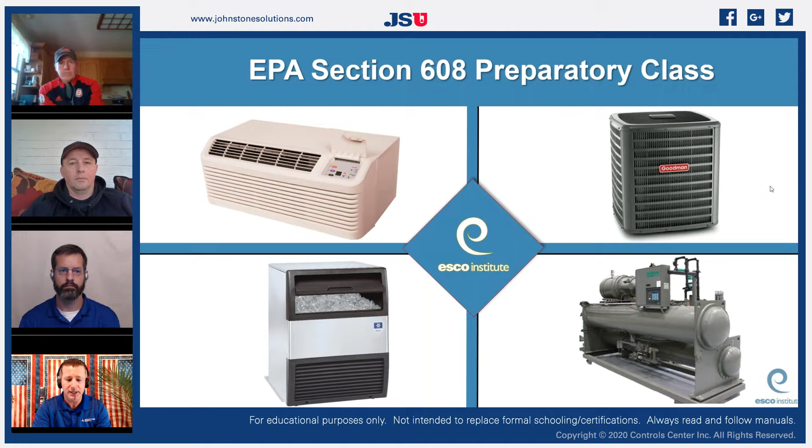So what the ESCO Institute does is they work hand in hand with the EPA to develop an appropriate training module for being prepared for your EPA license. This is built by ESCO, and this is owned by ESCO. It's just being presented by Johnstone Supply. I've been talking extensively with ESCO for the last couple of weeks, and they're very excited that we're offering this one-time free opportunity for you guys.

We normally do these ESCO classes once a month at each of our Johnstone Grimmie Group locations. With the situation that we have, we're just not able to do that. So we're just going to be spending time with you and prepping you for your EPA. So if you have not taken your EPA before, or if you just have a type 1 or type 2 and you're wanting to upgrade to a universal, or even if you just want to stay up to date on

the current EPA regulations, this is what you want to do, because EPA states that it is the responsibility of the technician to stay up to date on the most current regulations. So it will be your responsibility to stay updated with what is changing in our industry. And we've had a lot change in our industry.

So this manual is intended to prepare technicians for the Environmental Protection Agency, the EPA Section 608 certification examination, and contains the information required to successfully complete the exam. We are not saying that if you know all this information, you're going to get a universal EPA. We're just going to give you the majority of the material that you need to know, but it will be your responsibility to prep properly for your test.

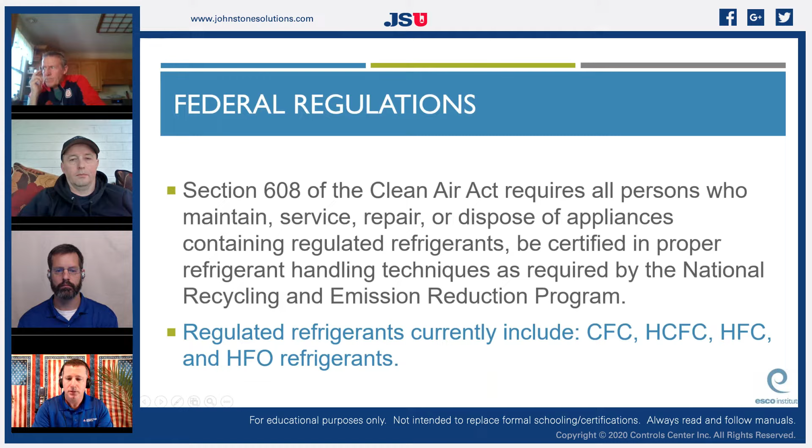If you maintain, service, repair, or dispose of an appliance containing a regulated refrigerant, you must be certified, and this is one of the big misconceptions in our industry. If you are an apprentice working with a technician in the field, you cannot legally work under another person's certification. The only time that falls into consideration is if you are in a classroom receiving instructor education, you can follow instructions from your instructor.

But if you're in the field servicing equipment, you must be certified. You cannot work under somebody else's license. So it's your responsibility to get certified.

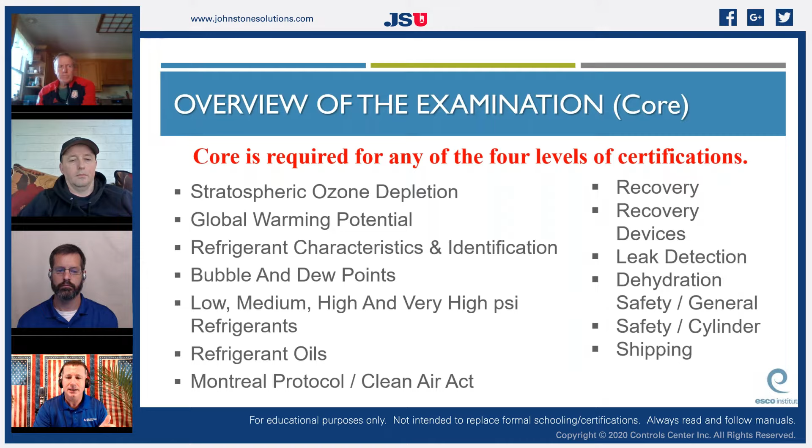If we're looking at what we're going to cover today and tomorrow, we're going to run through all of these. We're going to talk about stratospheric ozone depletion quite a bit, global warming potential. We're going to go through different dew and bubble points. We're going to talk about the different pressure systems, low, medium, high pressure, and very high pressure. We're going to go through all of our recovery, recycling, and reclaim techniques, and we'll spend quite a bit of time on each one of these.

So let's talk about what each section is, so you have an understanding of what type 1, type 2, and type 3 is. Type 1 will be considered persons who maintain, service, repair, or dispose of small appliances. They must be certified as type 1 technicians. A small appliance is defined as a pre-built assembly with a factory charge of 5 pounds or less. That's a lot of different types of equipment.

If we think about that, 5 pounds or less, that could be a packaged window air conditioner. That could be a refrigerator. That could be a chest freezer. That could be a water cooler. There's a lot of different things, ice machines, dehumidifiers. Those are all things that are included in type 1. So if you become a small appliance repair person, you're required to have type 1 and core.

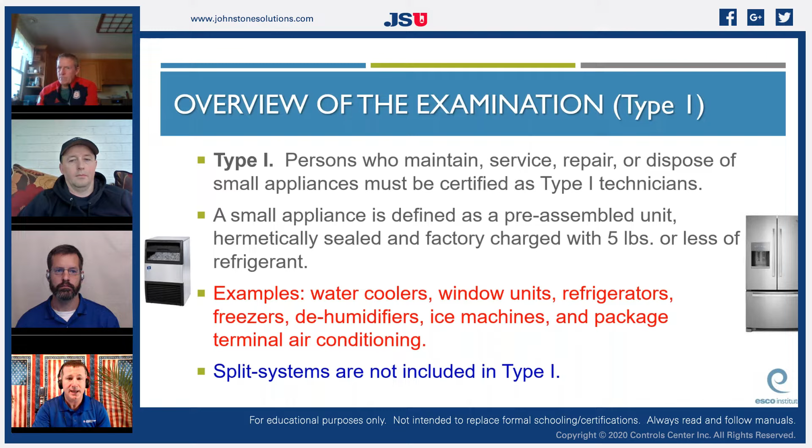Type 2 is persons who maintain, service, repair, or dispose of appliances containing more than 5 pounds of refrigerant, or if the installation requires charging. That's us. Anytime we have a system that has to be put together, where we have to calculate the refrigerant charge. Anytime we have soldering or flaring, that is type 2, and that is us. So in residential, commercial, and industrial air conditioning, that is going to be a type 2 license.

So we are required to have a type 2 license in our industry, and there's quite a few technicians out there that only have a type 1. So this is a great opportunity to study for your type 2 and for your type 3. Type 3 is persons who maintain, service, repair, or dispose of low pressure appliances. So that's centrifugal chillers, low temp, low pressure operating systems. It's a whole different classification of refrigeration, but it's still refrigeration. It's the same vapor compression cycle that we're talking about on even our fractional systems.

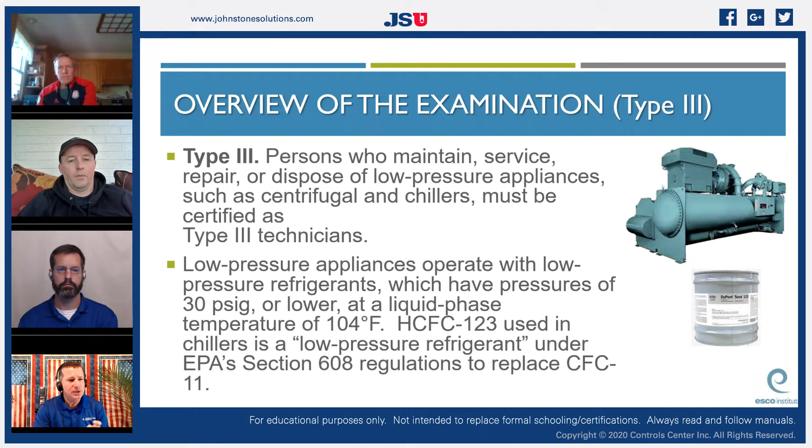The same refrigeration concept that is in your home refrigerator is going to be in these 100-ton centrifugal chillers. So we need to be able to understand that those are still just a large refrigeration system, but they have some special features and some special techniques that you need to know. And so that is a whole separate entity on its own.

If you achieve above 70% in all 4 areas, core, type 1, type 2, and type 3, you will then be awarded a universal, and that's really the goal. We all want you to achieve your universal certification. So that is a person who maintains, services, and repairs both low and high pressure as well as small appliances.

So we really want you to achieve that. So the test will have 4 sections to it. So we'll have core, we'll have type 1, type 2, type 3. Each section will have 25 multiple choice questions, all pulled out of a pool of around 2,000 or so questions. So there's a variety of different tests. So the tests are randomly pulled.

If you come to one of our classes and we're doing the paper one, I'm going to hold about 15 different paper manuals out in front of you. You pick which one. They're all different. A technician must achieve a minimum passing score of 70% in each group in which they are to be certified. For example, if a technician is seeking universal certification, they must achieve a minimum of 70% or 18 of the 25 questions on each section, on all 4 of them.

If a technician fails one or more of the sections, they may retake the failed sections without retaking those sections in which they earned the passing score. So say you go in and you pass core and you pass type 2, but you didn't get your universal, your type 3 and type 1. Well, you can go back later and just retake the ones that you did not pass. So you don't have to take the entire test over.

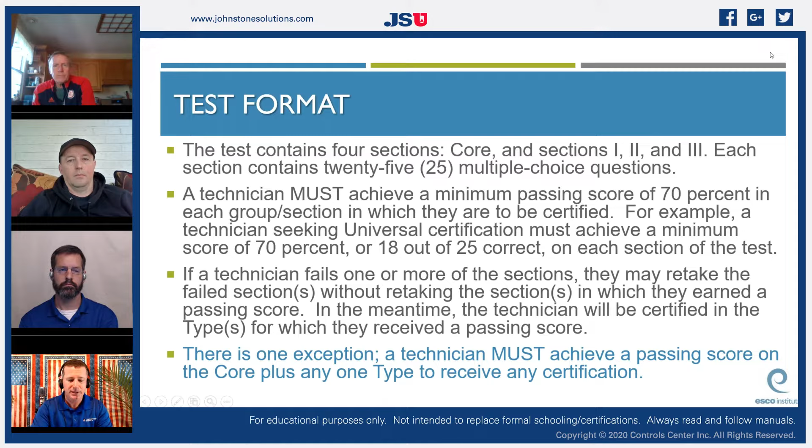So study, study, study. Federal regulations require that this exam be conducted as a closed book exam by an authorized test proctor, whether it's in person or whether it is through live video. The only outside materials allowed are the PT chart and a calculator. Phones are not allowed and must be turned off and put away. Best to not allow phones in the testing room at all.

I know in our classes, we've had people pull out their phones for answers before, and we typically don't pull that student out right then. We allow them to take the entire test because we're not going to disrupt the rest of the classroom. And at the end of the test, the test of the person who's been using their phone or been using material gets thrown in the trash. It's that simple. If you cheat, you cheat.

We don't allow it. Use of any other electronic communication device or attempts to copy, distribute, post publicly, share photos of exam questions, etc., may result in revocation of certification and will be reported to the US EPA. That has been done. I've talked to ESCO and they have verified that they have prosecuted people who have reproduced any of the test materials.

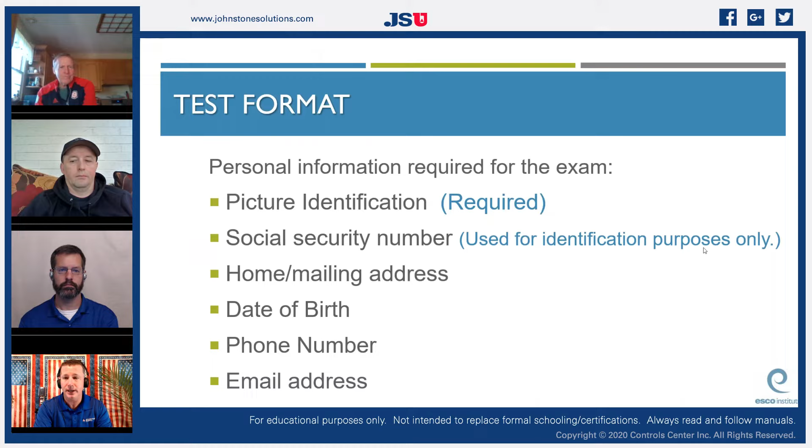Personal ID will be required, so driver's license, registered identification card, social security number, which you'll be using, and then a home or a mailing address that you'll put on that application, and that will be where your paper certificate gets mailed to. So it could be home, or it could be work, wherever you would like for that to go to. You'll need to have your date of birth, phone number, and an email address, and that will be all the information that is used to create your personal ESCO account.

As required, all examination participants must be included in an online registry for lookup by name, city, and state, as well as certification achieved. So there's an online registry from ESCO, because if you apply for a job, a lot of property management jobs, a lot of commercial heating and cooling and refrigeration jobs require a universal certificate.

So if you apply and you say that you have a universal and you actually don't, they may call ESCO and go, hey, does John Brown have a universal? And so they can use that as verification for what level you've acquired. Technicians will be able to opt out of the registry by logging into the ESCO group right there.

The technicians should carefully study the core and all the sections in which they are seeking to achieve a passing score. Definitely take the free online prep tests. They're right there at escogroup.org/practice again. They are provided to give each candidate a sample of the type of questions. They're not going to be the exact questions, but it'll be a sample of similar questions. I typically spend a lot of my time going over my compression cycle in class.

I'm not going to have a lot of time to go through that today, but we are going to go through the basics because it really all comes down to one philosophy. And if you can understand this philosophy, it'll make every piece of equipment you ever encounter a lot simpler. If we look at any refrigeration system, we have a low pressure side and we have a high pressure side. And we are going to have the same function of components in any refrigeration system.

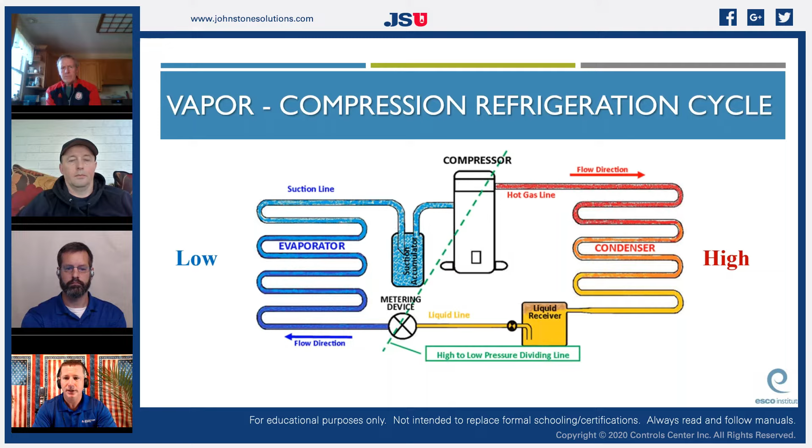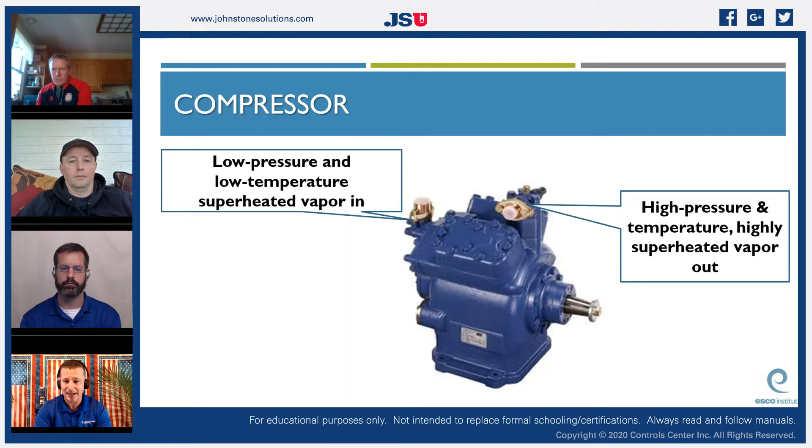So there's different types of compressors. If you look at those, every compressor is going to have a low side valve and a high side valve. It's going to bring in a low pressure vapor and it's going to pump it up to a high pressure vapor. The 3 stages inside of a condenser coil, no matter what condenser coil it is, remember, same philosophy. It's going to come in with superheated vapor. As it passes through there, it's going to start turning back into liquid droplets. By the time we get to the end of it, we should be all liquid.

And by the time we get to all liquid, we're actually going to cool it just a little bit more to make sure that it is completely liquid with no vapor in it. And that is going to be a subcooled liquid now. Same liquid, it's just a little bit cooler. It's not changed state, it changed state in the condenser. It's just a cool liquid.

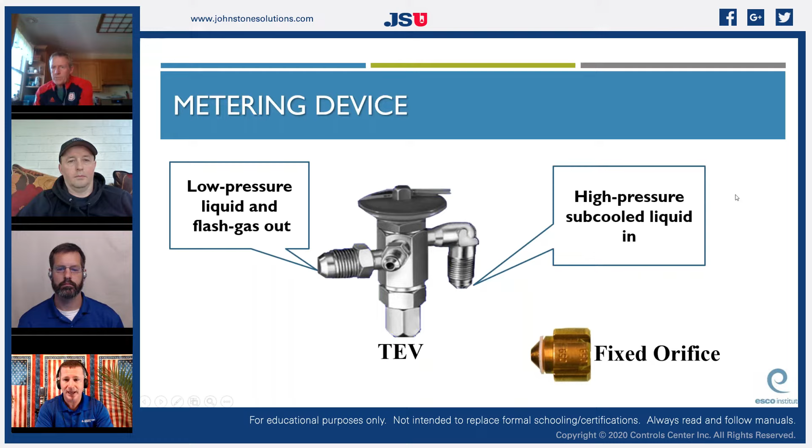Our metering devices are all doing the exact same thing. It's just reducing that pressure. We're coming in with a high pressure subcooled liquid, and we're coming out with a low pressure liquid. It's not a vapor, it's a liquid. It has vapor in it, but it's still about 75% liquid and 25% vapor. That vapor is what we call the flash gas, but it is primarily liquid at this point. It's just a lower pressure liquid. But whether it's a capillary tube or a fixed orifice or an expansion valve, all doing the exact same thing.

If we look at an evaporator coil, every type we run into, we're going to take that 75% liquid, 25% vapor mixture. We're going to go into the evaporator. It's going to boil on its own. It doesn't need any assistance from us. We reduce the pressure, which caused it to start boiling. So we don't need to move air across it, but we're going to take advantage of that process and try to remove some of the heat from our space, or from our water that's passing over on a commercial ice machine.

So we're going to pass through that system. All of our energy is exchanged while we are boiling from a liquid to a vapor, right? So by the time we get to the end of our evaporator coil, it should all be boiled off. There should be no more liquid. We just want to make sure there's no liquid, because the next stage of our system is our compressor, which is a vapor pump. So we want to make sure we've boiled off. So we know that we stopped boiling around here.

We just let that temperature rise a few more degrees, so that by the time it gets to the outlet, it is considered superheated, which just means it's heated above its boiling point. You know, if that was water at room temperature, water boils typically at what, 212 or so? So if I measured some steam and it was 215 degrees, I would say that it's superheated by 3 degrees. That's all we're doing.

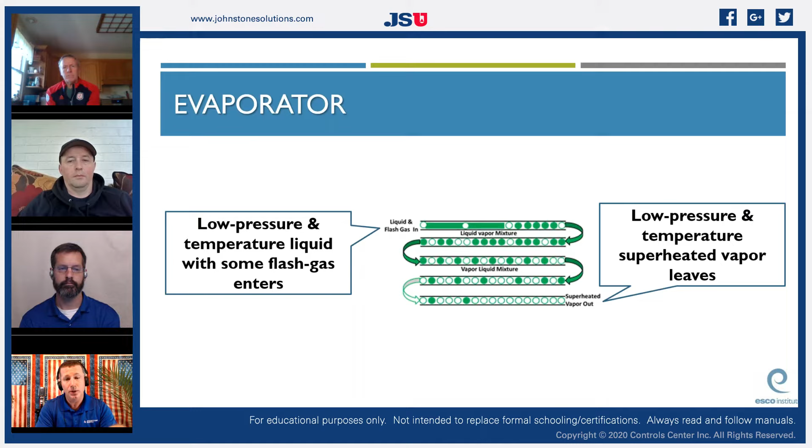All right, a system that uses a thermostatic expansion valve, or TEV, is usually equipped with a receiver located on the liquid line directly following the condenser, because remember, that expansion valve is expanding. It's moving, it's changing the flow of refrigerant. So if our compressor is just pumping along, but our coil says, hey, I don't need that much volume right now, I'm going to use my expansion valve, and I'm going to pinch down a little bit.

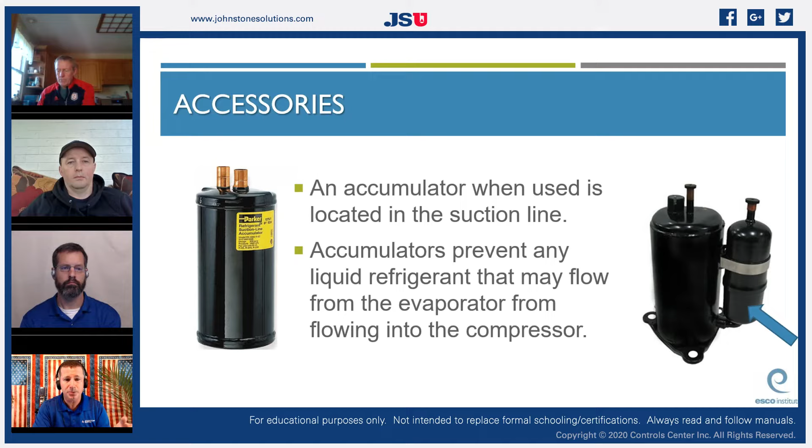Well, then that backs up how much liquid we have in our system. So we store it in a receiver. That's all it is, just a tank to store excess. An accumulator, when used, is located on the suction side. So accumulators prevent any liquid that might flow from the evaporator to get into that compressor. Remember, we cannot get it in there.

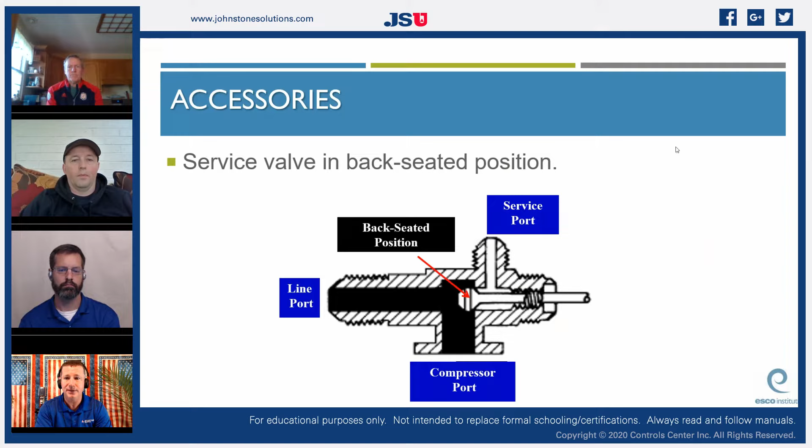If you have an elongated stem on your cap, that means you have a long stem service valve, and it's probably a back-seated style. So you actually have to take your service wrench, and this has got a square tip on the end of it. You take your service wrench and you run that in, just even a quarter of a turn is sufficient. So be aware that we have a couple different styles of service valves in our industry.

How to use a PT chart, because not everybody understands a PT chart. So what does a PT chart actually do? It provides the pressure temperature relationship of refrigerants. So if we take it at its core essence, what it is doing is telling us, at the pressure that is in our system, what temperature our refrigerant is going to boil or condense. So we can manipulate boiling points.

I do this in one of my classes. When I'm doing this PT chart, I actually take a mason jar of water, I put it on a desk and go, hey, what temperature does water boil at? If you don't know, you need to come back and watch some of our Flex Train classes, because we actually talk about that. Because water is a refrigerant.

It changes state. It changes from a liquid to a vapor, changes from a vapor to liquid. It also changes from a liquid to a solid. So we're just manipulating in the same way with refrigerants. So whether the tank is half full or has just a few ounces of liquid, the pressure will be the same if both tanks are at the same temperature.

So the refrigerant is going to have a stable state in it, and we actually show this in our classes as well. I can tell what refrigerant is in a tank by letting it stabilize. So if I leave it in a room that is 72 degrees overnight and I come back the next morning, it's still 72, I know that my refrigerant is stabilized at 72 degrees. I can take my temperature pressure chart and go, hey, R410A at 72 degrees is X.

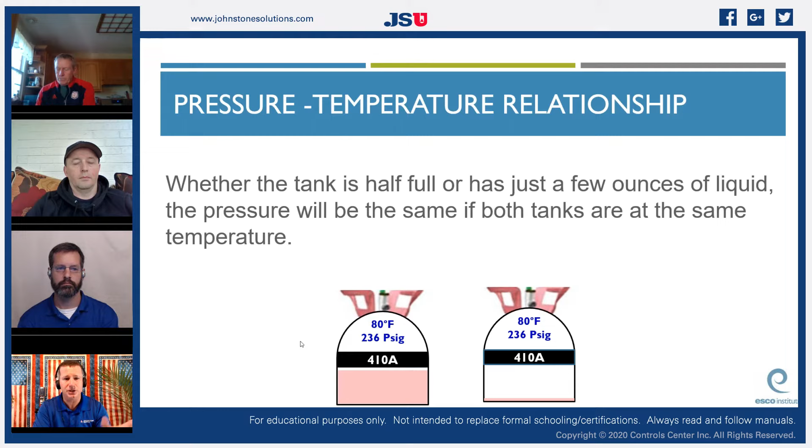If I go R410A and it's an 80 degree room, R410A at 80 degrees, I can put my gauges on there and I'll have 236 PSI. So it's a relationship to our temperature and our pressure.

Refrigerant will migrate to a compressor's crankcase and mix with oil when there's a difference between the oil pressure and the refrigerant vapor pressure. Compressor crankcase heater is used to control that. So a crankcase heater is absolutely crucial on the operating of a system. If you have a crankcase heater, particularly on heat pumps, you need to verify the condition of that crankcase heater, because it's used to keep that oil hot so our refrigerant doesn't migrate back into it. Remember, we don't want liquid into our compressor.

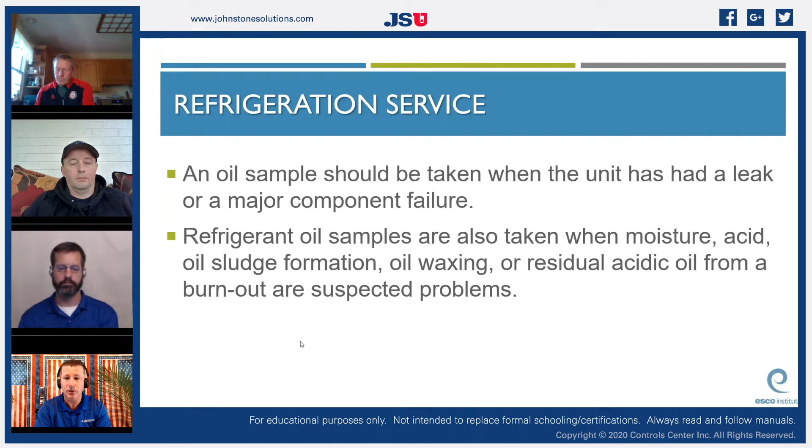An oil sample should be taken when the unit has had a leak or a major component failure, because we're going to be looking for contamination or acids in the system. Refrigerant oil samples are also taken when moisture, acid, or oil sludge formation, oil waxing, or residual acidic oil from a burnout are suspected problems. That's how we can tell what happened to the oil in the system.

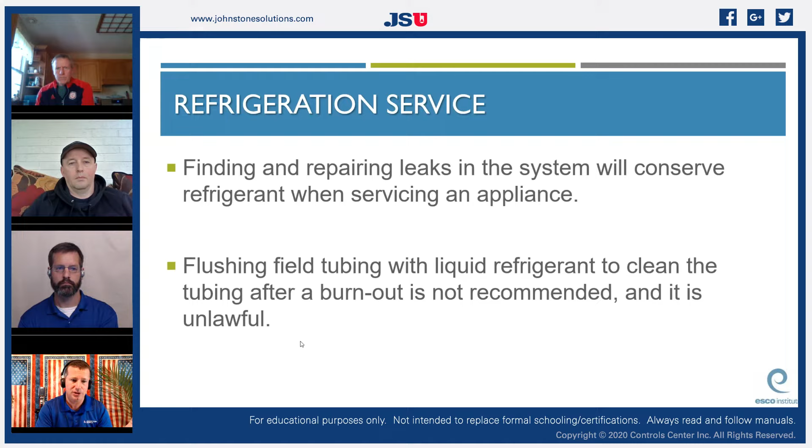Finding and repairing leaks in the system will conserve refrigerant when servicing an appliance. So flushing field tubing with liquid refrigerant to clean the tubing after burnout is not recommended. It is actually against the law. We have specialty cleansers. They're basically like refrigerants. They're a boiling liquid, but they're not a chlorine or fluorine-based refrigerant. They're a solution, a cleaning solution. We use a lot of like Rx11 flush. So we don't use refrigerant to flush out a line set.

We use certified cleaners. After we make a major repair, the appliance should be dehydrated by evacuating the system to a minimum of 500 microns. Every manufacturer has a requirement of 500 microns. I actually see people that are routinely running them down to 250 just to verify that they have gotten even below the manufacturer's recommendation. If you get them down to that point, you know that you're going to have a nice dry system. And we've actually got videos on how to properly evacuate a system and do it quickly and efficiently.

Under no circumstances should a hermetic compressor be operated when there is a vacuum in the system. Electrical arcing can occur that will burn the terminals inside of the compressor. So we have to make sure that our electrical disconnect is off when we're pulling vacuum on our systems.

When we talk about the gauge manifold set, I always teach in my classes how to read superheat and subcooling, actually calculate superheat and subcooling using a gauge manifold set, because they are a little bit different if you look at those. And it's the most important tool in our industry to be able to understand the pressures inside of a system. There's a low side and there's a high side, and depending on the refrigerant, the high pressure gauge may be rated 500 if it's an R22 system, sometimes even lower than that, and 800 if it's an R410A or higher.

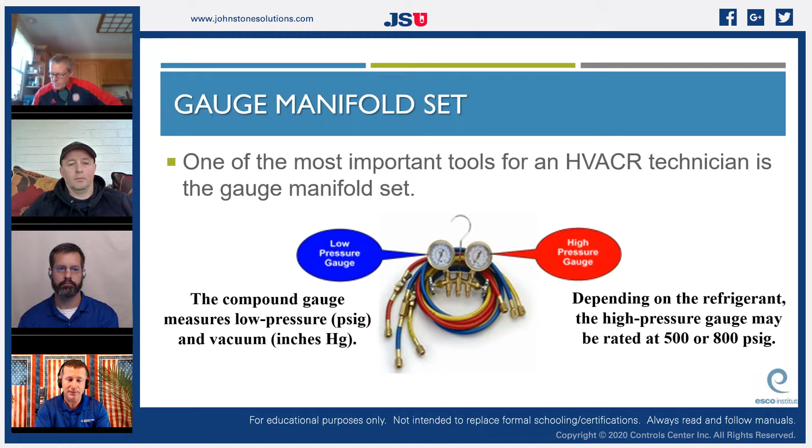Now, the compound gauge measures system pressure for low side in pounds per square inch, PSIG, and vacuum in inches of mercury. This is what makes the low side gauge different than the high side gauge. The high side gauge is just all positive pressure. The low side gauge is not really a low side gauge. It's called a compound gauge because it reads negative pressure in vacuum in inches of mercury, and it reads positive pressure in PSIG.

One of the things that I always point out to people, because they don't always understand what our internal dials are. Remember, we're talking about our temperature pressure chart. If I had a paper temperature pressure chart, that is telling us at what temperature our refrigerant is boiling based on the pressure in the system. That's all these inside dials are. We've just taken that PT chart and put it on a gauge.

So if I put my gauge on and I have 60 PSI on my system, then I know at what temperatures my refrigerants would boil. If I had, this is R22 on the green dial, my R22 would start boiling at around 33, 34 degrees, right?

So anything above 33, 34, I would be vapor. Anything below 33, 34, I'm gonna be liquid. If I was an R410A system, I would have my refrigerant boiling off at around 22 degrees. If I was an R134A system, my refrigerant would be boiling off at around 62-ish, somewhere in that ballpark. So all we have actually done is taken our fold-out temperature pressure chart and we've put it onto our dials so that it's easy to see.

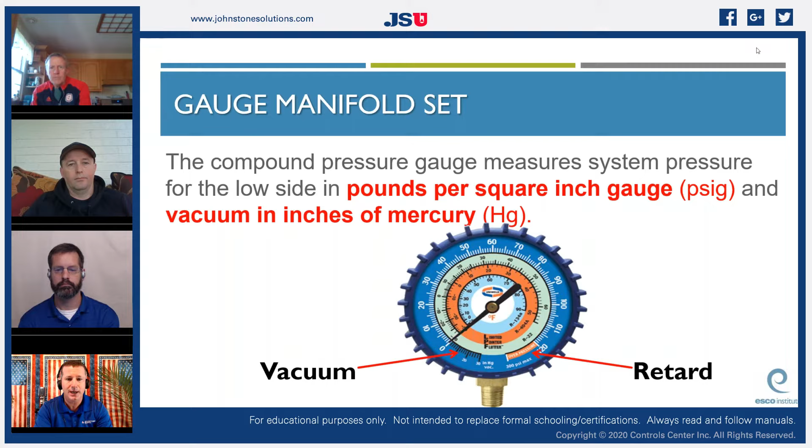An electronic manifold may have combined temperature probes to measure those temperatures so it can calculate superheat and subcooling. And I love using electronic gauges. They do the job for us faster. But like I said, if you don't know what they're doing, don't fool yourself. Don't look at a number and judge a system by the number that you're being told. Understand what that number is. Go back to our superheat and subcooling class.

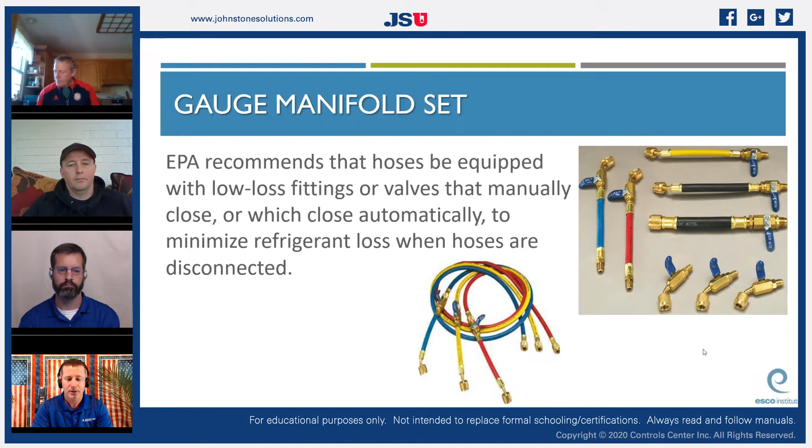EPA recommends that hoses be equipped with low-loss fittings or valves that manually close or which close automatically to minimize refrigerant loss when they are disconnected. There's a name for this, and you'll probably encounter this if you're taking an EPA-regulated test of any type. Minor releases when connecting or disconnecting the hoses for servicing and recovery are considered to be a de minimis release. The minimum, de minimis. This type of release is not considered unlawful.

So by law, you have to have fittings on your hoses. If you're just using standard hoses that are open on the end without any type of a low loss fitting, and you connect those onto an air conditioning or refrigeration system to service it, and you take that off and all of that refrigerant is escaping out of your hose, you're actually breaking the law. So something to be aware of. We need to make sure that it has fittings to make it a de minimis release.

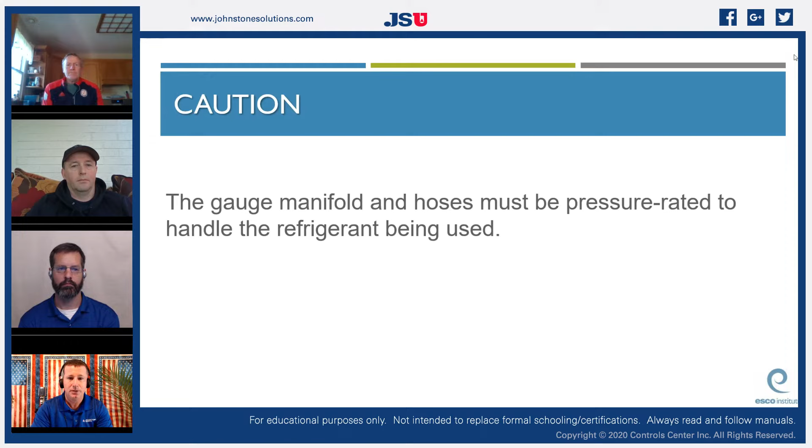The gauge manifold and hoses must be pressure rated to handle the refrigerant that's being used. If you go to a yard sale and pick up an old set of R12, R22 manifold gauges, you're not going to want to put that on that R410A system. The hoses are probably not rated for burst pressure properly. So be aware that your hoses need to be of proper ratings.

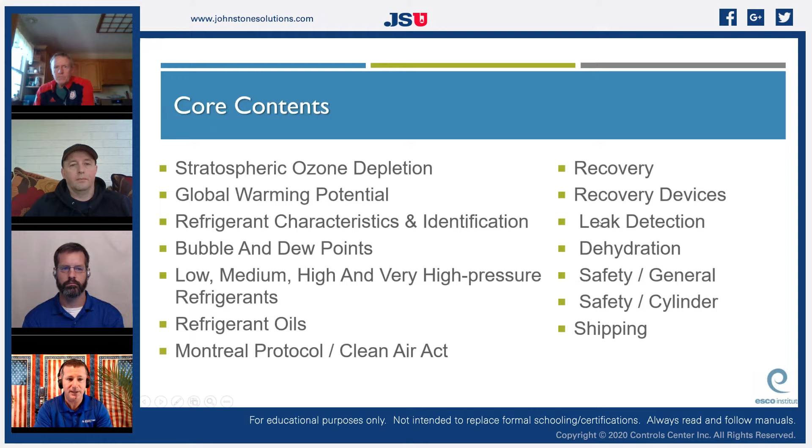Now, when we get into the science of why we're here, the main topic is going to be stratospheric ozone depletion. That's the whole reason the EPA is in our industry. EPA is governing what we do because of effects that we have found in our ozone, and it primarily happens with our stratospheric ozone depletion. There's going to be a lot of science here. So if you're science buffs, you're going to enjoy this. If you don't like science, you may struggle on understanding some of this, and you need to understand what we're talking about. So this would be really good stuff to do prep courses on if any of this is unfamiliar to you. So let's just kind of rebrief what we're going to be talking about.

So stratospheric ozone helps form the Earth's protective shield. The ozone layer protects Earth from ultraviolet radiation from the sun. And if you're from my generation and older, you're going to know the words the ozone hole. You've been told about the ozone hole. A lot of younger generations weren't focused as much on the ozone hole. We're going to talk about that here in just a minute.

But through the 1990s particularly, we started talking about this thing called the ozone hole and the hole in the ozone layer. And we talked about it in school, and we started understanding that we had this hole in our ozone, and we didn't really dive into what it was. We just knew that it was there, and we knew that it had some negative effects.

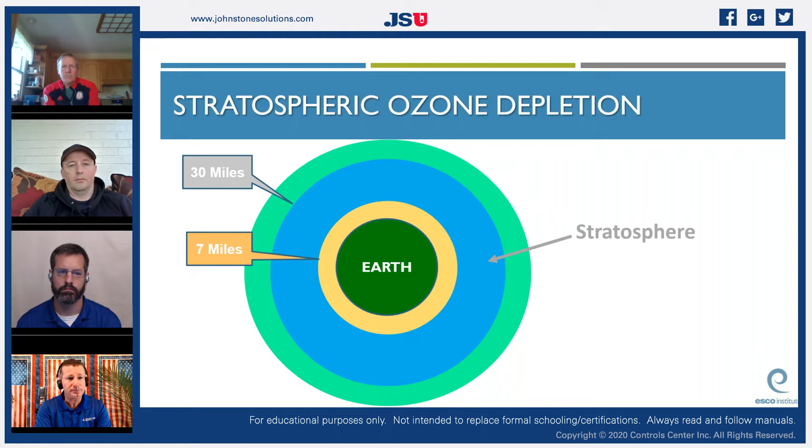Well, when we start talking about the ozone layer and the hole in the ozone, we need to understand where it's coming from. And what we're going to talk about is stratospheric ozone depletion. So the stratosphere is a layer of vapors that is between 7 and 30 miles off from Earth's surface. Very important to know, between 7 and 30 miles.

And ozone depletion potential measures the ability of a substance to destroy ozone in the stratosphere. So what scientists found in the 1990s, when we started recognizing this hole in the ozone and what it really is: when we think about it, we just think of something that burst through and burnt this hole into the stratosphere. Well, it's not really that. It's really a large area of the stratosphere where we have measured a depletion of ozone quantity, and it's a very significant area.

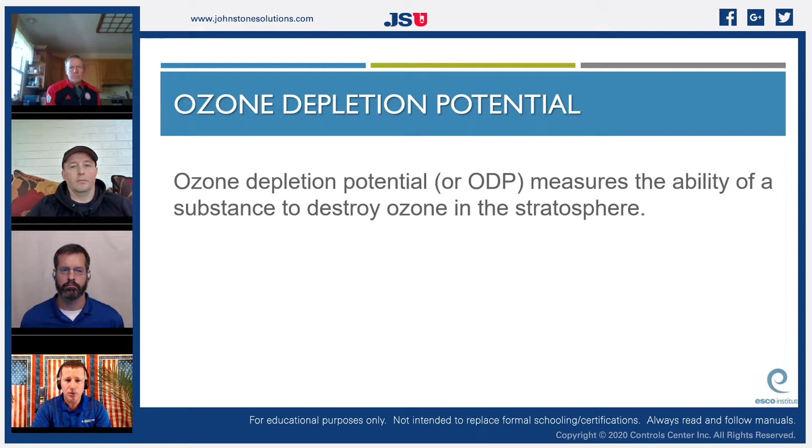But we were measuring it, and we noticed it increasing. We noticed this hole growing, and we didn't really know why. So we started looking at why the ozone was depleting. We started measuring different chemicals found in the stratosphere over a period of time, and looking at what could be the potential ozone depleting substances, right? And we were also finding that as the hole in the ozone, or this depletion of ozone, was increasing, we noticed some effects around the world, and that it was a global problem affecting all of us. So we needed to find out why we were having this issue.

So one of the most serious results from the thinning and damaging of the stratospheric ozone layer is an increase in the rates of skin cancer in humans. And I'm here to preach this to you. I lost my father not even 2 months ago from skin cancer. He worked heavy machinery through the 1980s, 1990s, and 2000s, before they started using canopies, before they started understanding the severity of skin cancers. And we are really finding a huge increase in skin cancer in humans over the last 3 decades, very much because of the destruction of our ozone.

All these little spots on my face, every few months I have to get them burnt, and that is because of working in the HVAC and refrigeration industry, being on roofs all the time, being out in yards all the time. As technicians, we need to be very aware that we are working and living in an environment that has become more dangerous over time.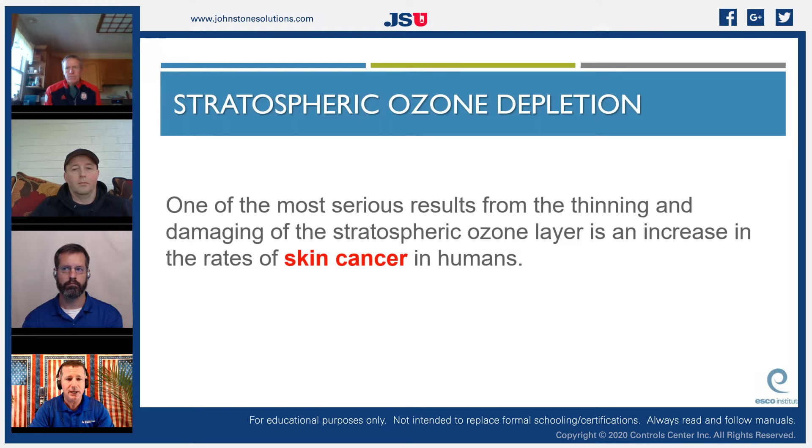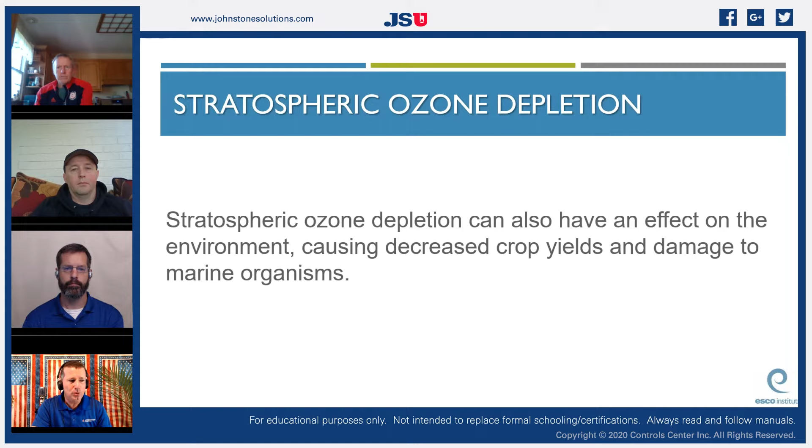So we started looking at why we were having these increases in skin cancers and in cases of cataracts around the world. And we really started finding that it was an effect on our environment, even our crop yields and marine organisms. We've all seen coral reef destruction and devastation, and it's all happened in a very short window of time, right? So we knew this hole in the ozone was probably a culprit, and we started measuring higher levels of chlorine and fluorine.

So scientists started going, okay, are there other places where we can get this? And we did. Air samples taken over erupting volcanoes showed an increase in chlorine up in our stratosphere. And we're like, maybe it's volcanic eruptions. Well, then we saw that the particular type of chlorine released by volcanoes would actually return back to the surface the way nature intended it to, right? But we found there was a lot of chlorine and fluorine that was staying there.

And as we measured this increase of chlorine and fluorine in the stratosphere, we noticed a direct correlation to the chlorine and fluorine we were manufacturing down here at the surface. The rise in chlorine measured in the stratosphere matched the rise in the amount of fluorine. They were going up the same, and they were a very different chemical formulation than the chlorine coming from the volcanoes. This increase of chlorine and fluorine were following each other, following a path.

So the rise in the amount of chlorine measured in the stratosphere by NASA and other agencies over almost 30 years now matched the rise in chlorofluorocarbon and hydrochlorofluorocarbon emissions over the same time. So as they were tracking refrigerant use and refrigerant release, they went, uh-oh, we've got a problem.

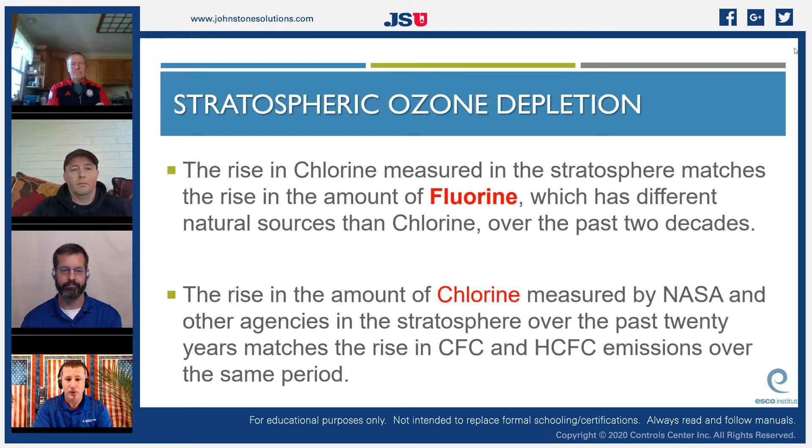These refrigerants are our culprit. We talk about global warming a lot now, but in the 90s, we talked about the hole in the ozone because that's when we found the direct correlation. Yes, fossil fuel emissions are a major component to global warming. They don't have much to do with this ozone depletion factor.

And so what we found, and it was very, very clear, that the culprit was chlorine, man-made chlorine. That chlorine-containing refrigerants have changed the natural balance and thus depleted a significant part of our ozone layer. And we went, holy smokes. Let's study this a little bit further and let's find out what's going on.

So what they found was that if we look at an ozone molecule itself, an ozone molecule in its essence is a component that has 3 oxygen atoms, all tightly bonded to each other, right? That's it. It's oxygen, oxygen, oxygen. But they molecularly connect and they form a very, very tight bond. And by design, that's what they're constructed to do. That's what they were created for. And what they do by having that bond is that they reject ultraviolet radiation.

So what we did, and we were able to prove this in labs, we've seen it going on in the stratosphere, we would find that when we introduced a chlorofluorocarbon molecule with ultraviolet radiation, we could simply take a UV light and a vapor refrigerant and penetrate that with UV light. And when ultraviolet radiation came in contact with a refrigerant molecule, and this is chlorofluorocarbons, we're talking like R12, ultraviolet radiation would separate off one or multiple of those chlorine molecules.

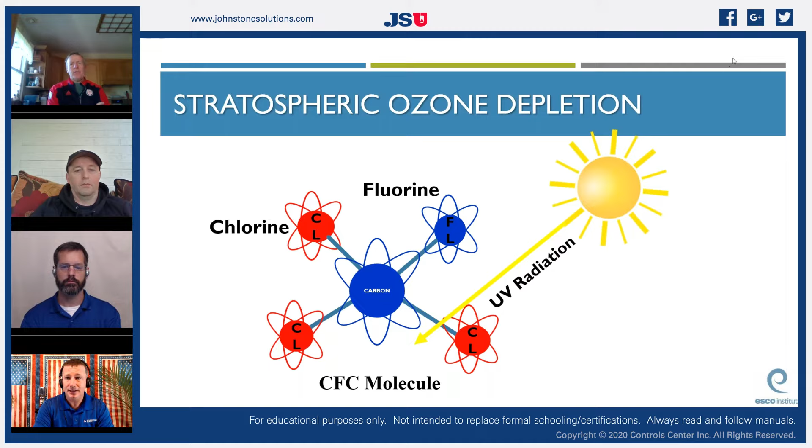Then when you had that free chlorine molecule, it could actually introduce itself with the ozone molecule, and it had a molecular weight that would draw off one of those oxygen atoms. So we no longer had an ozone molecule that had 3 oxygen atoms. We would actually tear it apart with one of our chlorine atoms. So our chlorine would bond with the ozone molecule, pull off one of the oxygen atoms, and now we were left with 2 new unique chemicals, a chlorine monoxide and a diatomic oxygen, O2.

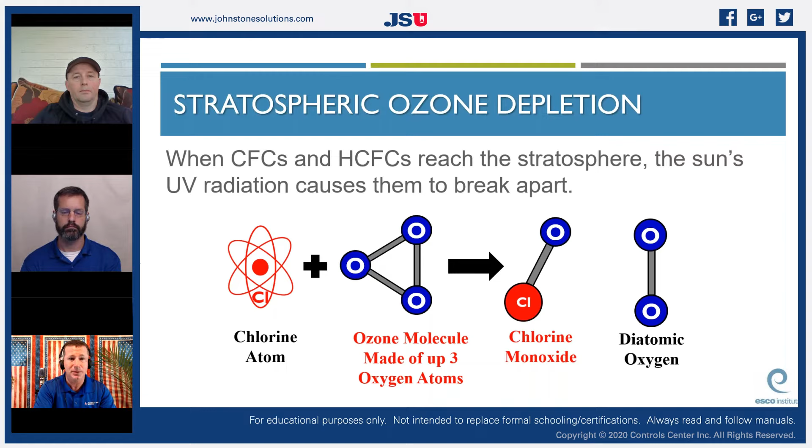O2 is not a big deal, right? O2 is pretty good stuff. The downfall is it didn't have that molecular tension that it used to have as an ozone molecule to reject ultraviolet radiation. So now we have 2 new chemicals floating through the stratosphere, chlorine monoxide and diatomic oxygen, and we were able to measure those. We measured an increase in chlorine monoxide, an increase of diatomic oxygen, a decrease in ozone, and unfortunately, the ultraviolet radiation started penetrating through. All because of a man-made chlorine molecule.

So the chlorine monoxide will collide with other ozone molecules, releasing its oxygen atoms and forming 2 O2 molecules and leaving the chlorine free to attack another one. So it used that chlorine molecule to destroy an ozone, became a diatomic oxygen and a chlorine monoxide, and then pulled that chlorine off and began that process over again.

So a single chlorine atom can last in the stratosphere for 120 years. And while it is there, it can destroy up to 100,000 ozone molecules. That's pretty significant. So if I take 1 pound of a chlorofluorocarbon, I can potentially destroy 100,000 pounds of ozone molecules. That's huge. When we started seeing those numbers, we immediately had to make a worldwide stance to change things.

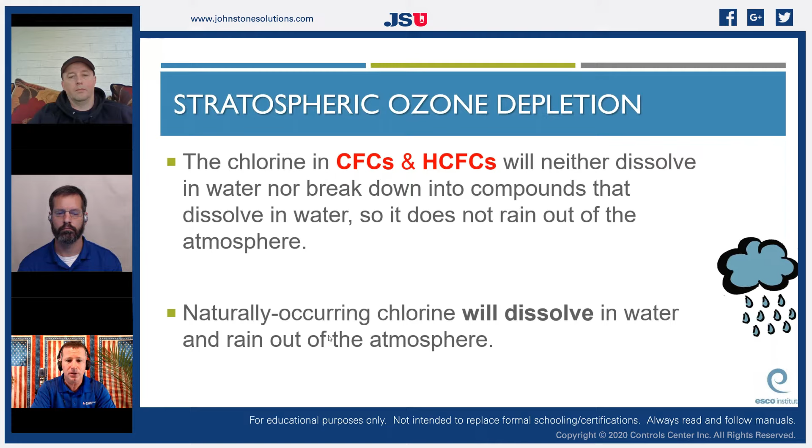So the chlorine in our chlorofluorocarbons and hydrochlorofluorocarbons neither dissolves in water nor breaks down into compounds that dissolve in water. So it doesn't just rain out of the atmosphere. Naturally occurring chlorine will dissolve in water and rain back out of the stratosphere. It doesn't stay up there for 120 years.

So hydrofluorocarbons are made up of hydrogen, fluorine, and carbon, right? So all the HFCs that we work with do not contain chlorine that affects the ozone layer, but most hydrofluorocarbons have a high global warming potential. And we're going to dive into that a little bit further. So in the 1990s, we started going, hole in the ozone's from the chlorine. Oh boy, we got to get rid of some chlorine.

So we started re-engineering our refrigerants and removing the chlorine out of them. What we ended up with was hydrofluorocarbons, right? With hydrofluorocarbons, we had no chlorine, but we had a fair amount of fluorine in them. And as the ozone layer started repairing itself, which it has been very significantly for the last 3 generations, we started noticing the Earth is still warming, and we went, oh man, what happened? Thought we got rid of that when we got rid of the chlorine.

Well, what we found was that we had another scenario that we didn't even look at when we were doing all of our studies in the 1990s. We weren't looking at that global warming effect of the gases. What we found was fluorine was an additional culprit. So when we're talking about ozone depletion, we're talking about chlorine. When we're talking about global warming potential, we're talking about fluorine.

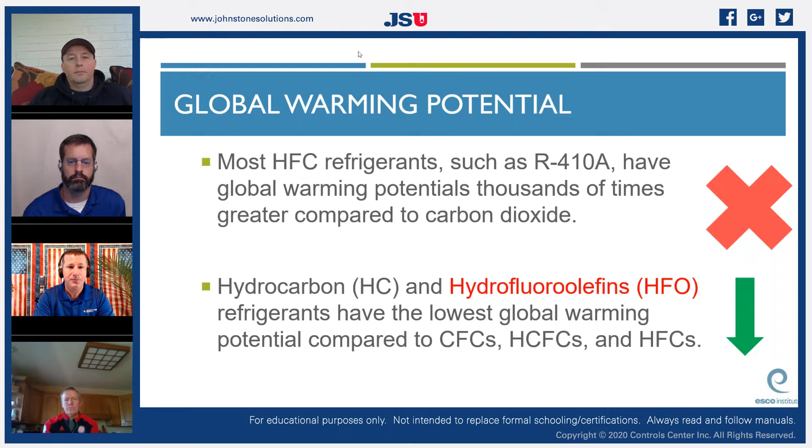All right, so let's talk about some global warming potential real quick. So most hydrofluorocarbons, HFC refrigerants, such as R410A, we all know that one, they have high global warming potentials, sometimes thousands of times greater than CO2. Hydrocarbons and hydrofluoroolefins, HFOs, have the lowest global warming potential because they have low amounts of fluorine, right? So we really have got to reduce the chlorine and we've got to reduce the fluorine no matter what.

If we look at the global warming potential of some of these new refrigerants like R600 and R290, which is purified propane, and R441, they are significantly lower when compared to the GWPs, or global warming potential, of the HFC refrigerants such as 134A, 407, 404, and 410A. We know those refrigerants, right?

134A is in vehicles. It's in light refrigeration equipment and commercial refrigeration equipment. We know 407C is a replacement R22 style refrigerant. 404 is our commercial low temp refrigerant, and R410A. All of these are on the way out. They're all on the chopping block. We're going to dive into why very quickly.

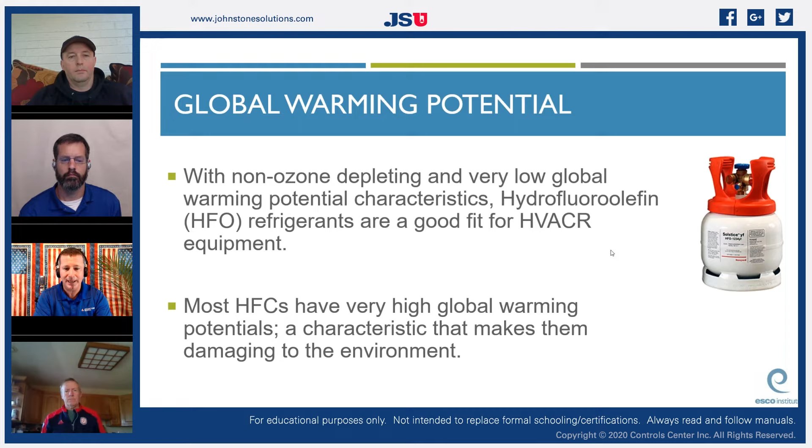So with non-ozone depleting and very low global warming potential characteristics, hydrofluoroolefin or HFO refrigerants are a good fit for HVACR equipment. So you're going to be seeing a lot more of these HFO refrigerants. Most HFCs have very high global warming potentials, a characteristic that makes them damaging to the environment. R410A is the main one right now.

So refrigerants may be identified by their type, which is all about what chemicals are inside of them. Those CFCs, chlorofluorocarbon: chlorine, fluorine, carbon, that's all it is. Hydrogen, fluorine, chlorine, and carbon. And the American Society of Heating, Refrigerating and Air-Conditioning Engineers, or ASHRAE, number: they have the R plus the ASHRAE number, such as 134. It's all the chemical configuration. So that's what we're using our designations for.

We have to start talking about classifications of refrigerants, and we're going to have a little bit of this in probably every section of this prep. So when we look at refrigerants, we're going to have a new classification chart, and this is going to be very important because this classification chart is going to be used for a variety of applications, because now we're talking about flammable refrigerants, right? So now we're going to start getting the DOT and other federal jurisdictions involved with the handling of our refrigerants, because in the past we've not had flammable refrigerants. We're going to have flammable refrigerants going forward. So you need to understand this classification, and you need to understand it very well.

If we look at the classifications, it's going to begin with a letter. If it has a low toxicity, it's going to have an A. If it has a higher toxicity, it's going to have a B. So that's going to get it into a classification based on its toxicity, how poisonous it is. And then we're going to talk about how flammable it is. And right now, we're going to go from 1 to 3.

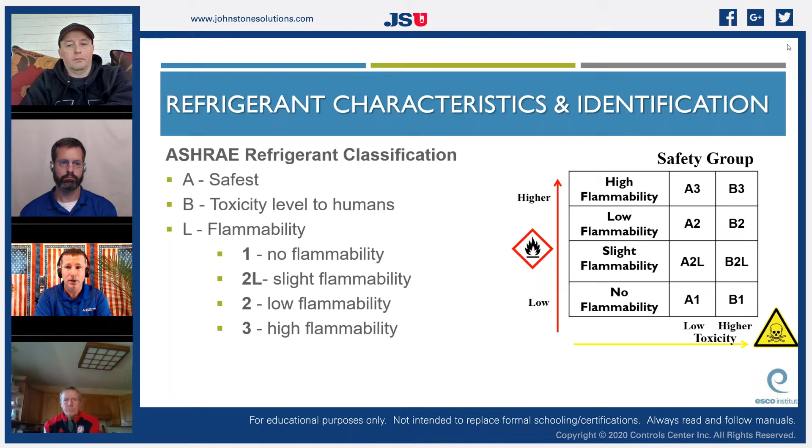When we get into an A2L, they will not light unless they have a continual ignition source. They have to have a constant flame for those to have any type of flame off of them whatsoever. So they cannot maintain their own combustion cycle, basically. And it's very important to know, because A2Ls are going to be a classification that is going to take over our industry because it is low global warming and low to no ozone depleting. So we need to know that chart very, very well. Come back and get familiar with that chart.

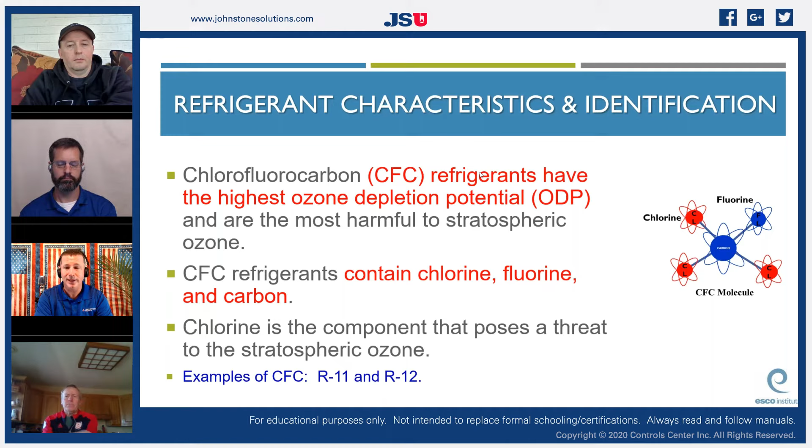Hint, hint. CFC refrigerants, they have the highest ozone depleting potential and are the most harmful to stratospheric ozone. That was found in the 90s. CFC refrigerants contain chlorine, fluorine, and carbon. So chlorine is the component that poses the biggest threat to the ozone. So that was like our R11s and our R12s. So we did a quick job of cutting those out of our system. We'll talk about that again here in a minute.

Hydrochlorofluorocarbons, HCFC refrigerants, they contain hydrogen, chlorine, fluorine, and carbon. The hydrogen makes them a little less harmful to the stratospheric ozone when compared to CFCs, but it's the chlorine that really does most of our damage. So the hydrochlorofluorocarbon refrigerants that have an ozone depletion potential of more than 0, they range between 0 and 1. Those are going to be like HCFC R22 and R123. So we're going to talk about those a little bit further.

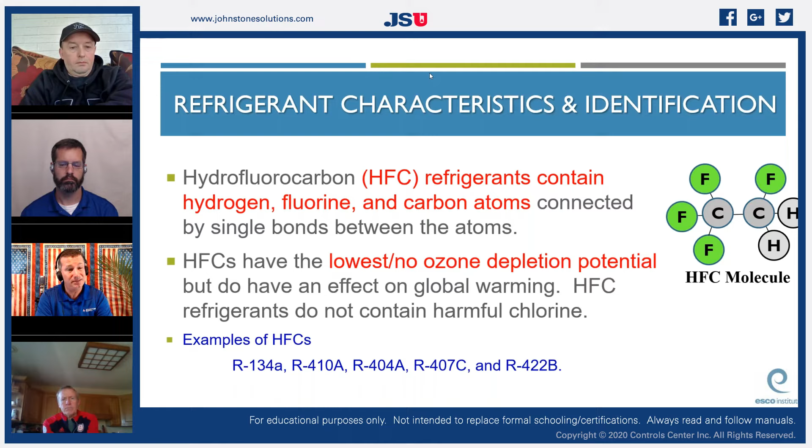HFC refrigerants, those are refrigerants that contain hydrogen, fluorine, and carbon atoms, right? They don't have the chlorine. They have the lowest or no ozone depleting potential, but they do have an effect on global warming because of the fluorine. So that would be like our 134s, our R410A, our 404, 407, 422B. Pretty common refrigerants to most of us, especially in the residential HVAC and light commercial world.

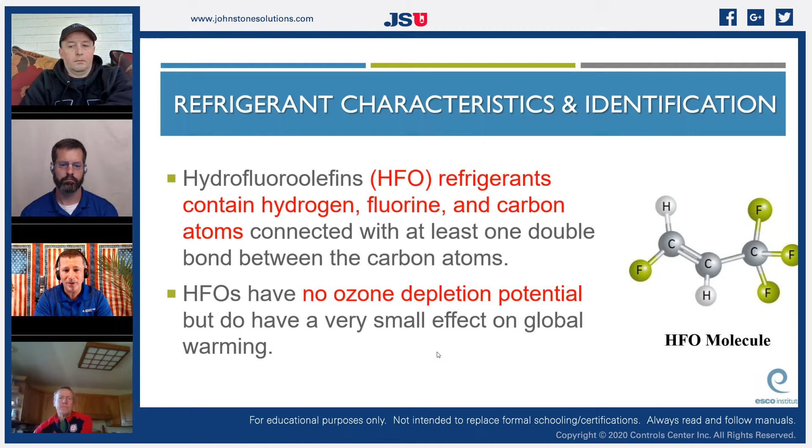That's our common refrigerants. We're going to see more HFOs, or hydrofluoroolefins. They contain hydrogen, fluorine, and carbon with at least one double bonded molecule. So they have multiple carbon cores to them, so they're a more complex structure. HFOs have no ozone depleting potential because there's no chlorine in them, but they do have a small effect on global warming because they have a little bit of fluorine in them. So it's all about working with the ozone depleting and the global warming, and it's a hard balance for our chemists to come up with the right solutions.

HFOs are less flammable than hydrocarbons, but they still are mildly flammable. So they're going to have their own classification, which is the A2L. HFO refrigerants contain fluorine, making them less flammable than hydrocarbon refrigerants. The fluorine kind of tempers it a little bit. And that's one thing we have to talk about too. A lot of people don't understand that.

R410A, we know it is a mixture of 2 different refrigerants, 2 different chemicals. It is a 50-50 blend of R32 and R125. R32 is slightly flammable, so they mixed in R125 because it was a flame deterrent. So R410A is actually R32 and R125 mixed 50-50. And as we move into some of these new refrigerants, you're going to see a lot more like that R32. Most of the world uses R32. So don't be afraid of these new chemicals. Just need to understand where they come from.

So when someone talks about R32, because companies like Daikin are going to be going to R32 in their package units here in just a couple of years, just be aware that it's not a horribly new refrigerant. It's half of the one that we already know, R410A. It just doesn't have the flame retardant in it. So HFO refrigerants, they are miscible with POE lubricants. That's pretty good. And one of the most common ones is R1234YF. It is an HFO refrigerant currently being used in chillers.

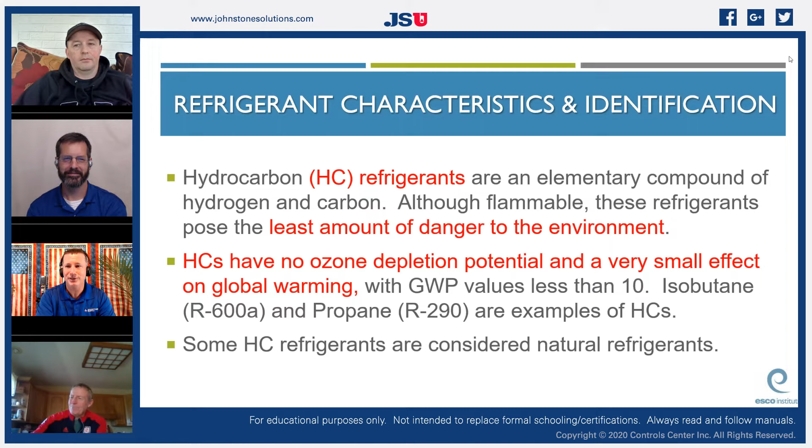R290 is currently the replacement choice of R134A in small fractional systems. We'll talk about that a little bit. We can't use a whole lot of it. Why? It's flammable. Nobody wants 4 pounds of propane in their air conditioning system, do they? Oh, that's right, California does. Some hydrocarbon refrigerants are considered natural refrigerants, right? Like propane, very natural. We just have to filter it.

Propane cylinders for grilling should never be used as a refrigerant as they contain impurities. You know, we add sulfur to those so we can smell it. So propane in its purest has no odor to it. So our R290 propane, I'm at home, I'm not at the shop. If I was at the shop, I'd actually show you. We carry 1 pound cans of R290 here at Johnstone Supply. It's purified propane, it has no impurities in it, and it does not smell.

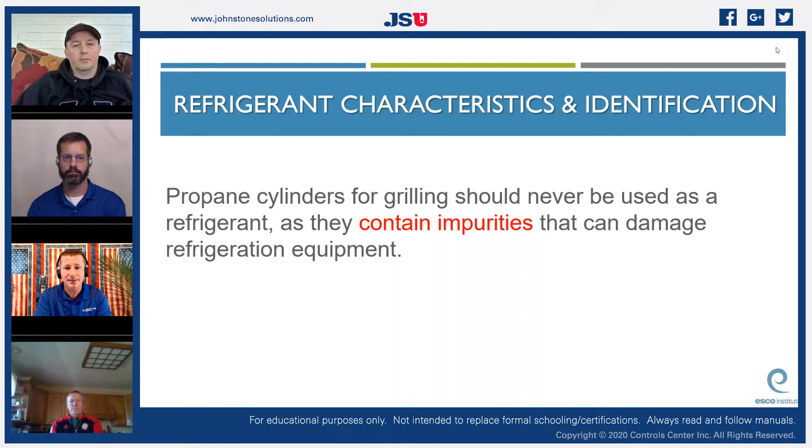So one of the dangers of some of these HC refrigerants is that they don't have an odor to them. If I have a leak on an R290 system, I don't smell it. It's not like the propane in our grill. We have a couple different types of refrigerants. So I want to talk about azeotropic and non-azeotropic mixtures.

So an azeotropic refrigerant mixture contains 2 or more refrigerants, right? So if we look at a chemist, they're trying to balance all of these different chemicals so that we can have a safer chemical. So we're going to have all sorts of new chemicals out there because chemists are going, hey, let's mix these things together and let's find the safest ones.

So with an azeotropic refrigerant, at a certain pressure, an azeotropic mixture evaporates and condenses at a constant temperature. So that just means I can take different chemicals, pour them all together, and they act like one chemical. That's it. So it acts like a single component over its entire range. So an azeotropic mixture acts like one mixture. So no matter what temperature it's at, or whatever pressure, they correlate exactly. We have another one, though, because not all chemicals like each other.

So if we talk about zeotropic or non-azeotropic, the refrigerant mixtures are mixtures of components that have different boiling points. And it's a mixture of a blend of different refrigerants. So the blend may be binary, which means it has 2 parts, or ternary, which means it has 3 parts to it.

If we look at R410A, R410A is a binary, and it does not have a perfect glide to it. We call it near azeotropic. There's actually about a half a degree or so. So even though we've got 2 different chemicals in R410A, they don't like each other perfectly. They have about a half a degree difference on them because that R32 and that R125, they boil at about a half a degree different.

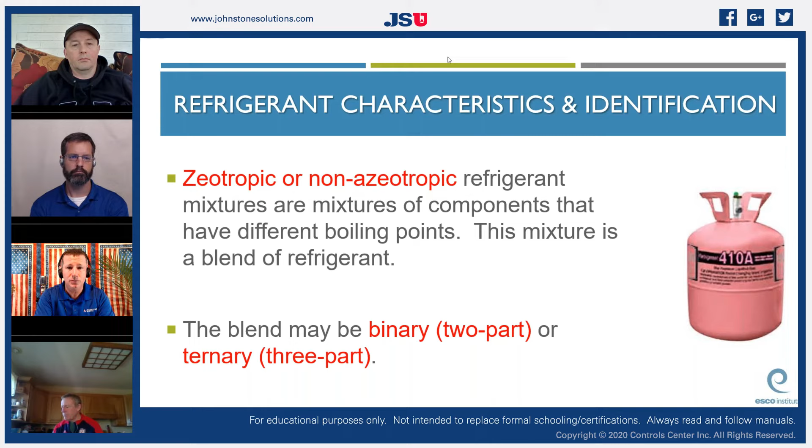So there's a slight difference. When we first came out with R410A, manufacturers were very afraid of this. When we first started having warranty evaporator coils, a lot of manufacturers gave you a refrigerant allowance because they wanted you to pull all that refrigerant out, because I might be able to lose it. If I was within half a degree of that boiling point, I could lose one of those chemicals, not the other. And we'll talk about that here in just a second.

So what happens is, blended refrigerants are normally associated with having what is called a temperature glide, which means they don't act exactly the same together. It's due to the blended parts having different pressures for their saturation temperature. A temperature glide can range from a few tenths of a degree, like R410A at 5/10 of a degree, to 12 degrees or more.

In the commercial world, when we moved away from R12, one of the interim refrigerants we had was R414B. Some of us know it as Hot Shot. Hot Shot had a glide to it, which means it had a bubble point and a dew point based on its 2 different refrigerants. So if I put my gauges on there and looked on my chart, instead of it having an exact temperature, it had this glide, this other color on my chart.

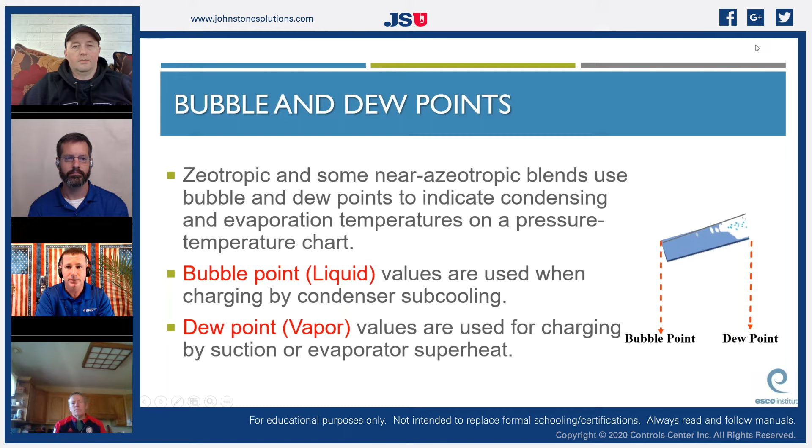The dew point, same kind of thing. So it's going to be used for superheat. That's going to be on our evaporator, because one chemical is going to say, hey, I've already boiled off. And the other one says, sorry, sucker, I got 4 more degrees before I start boiling. So it makes a window that thing is actually going to boil. So dew point and bubble point are going to be more common in our industry than what you're used to right now. R400 series refrigerants, R410A, R404, 407, 422, they are near azeotropic blends,

blends that can leak from a system at uneven rates due to different vapor pressures, which can affect the percentage of each refrigerant. You know, the proper charging for any R400 refrigerant is to weigh the refrigerant in on the high side with liquid. We don't put it in as vapor. That's why when we're charging with R410A, we put our tank upside down, right? Because we want to make sure it's all liquid.

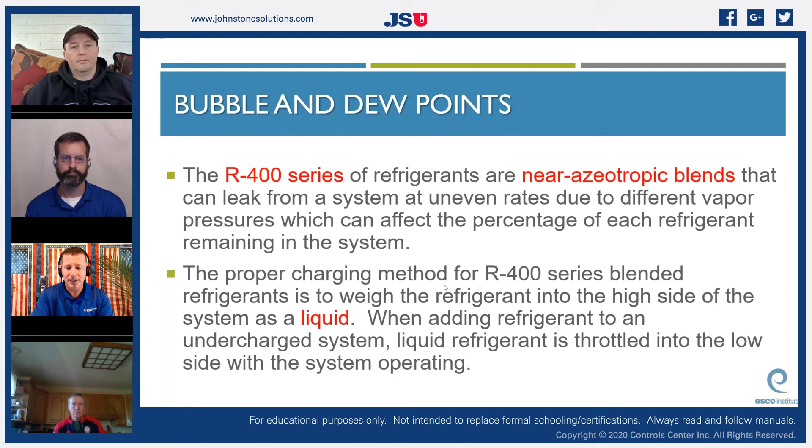That wasn't always necessarily so, because if we had like an R22, we didn't worry about it. R22, if I had it upright, I just had R22 vapor on top, right? And R22 liquid in the bottom. R410A, depending on the temperature of my tank, I could have maybe more of my R125 in vapor form than what my R32 is. My tank may be a perfect blend, 50-50, but my vapor might not, because they boiled at different temperatures. So we have to put it in as all liquid on any 400 series refrigerant.

So what that means is, if we look at that, imagine we were looking at this as R410A, right? Which kind of is, actually. You have different fractionization of the refrigerants, which means that if I have a leak at a certain temperature, I could actually leak more of one refrigerant than the other. So R407C, that has a very high temperature glide, right? So let's look at R407C instead of R410.

So R407C, it's a blended refrigerant. It's got a couple of refrigerants in it, right? So when it's in its liquid stage, it's 2 chemicals that are equal, balanced, right? So in liquid form, it acts as one liquid. When it boils, because remember, they boil at different temperatures, I could have a change in my refrigerant. So I don't know exactly what this temperature would be because I don't know what my pressure is, but let's just say at whatever pressure my system is, my R407C is in liquid form. Let's just say 40 degrees.

And let's just say at whatever pressure we are at 40 degrees, one of our chemicals begins to boil before the other one. So let's just say chemical A boils off at 40, and chemical B doesn't boil off until 42. And my temperature on my tank is 41 degrees. So it's sitting in my van. It's 41 degrees outside.

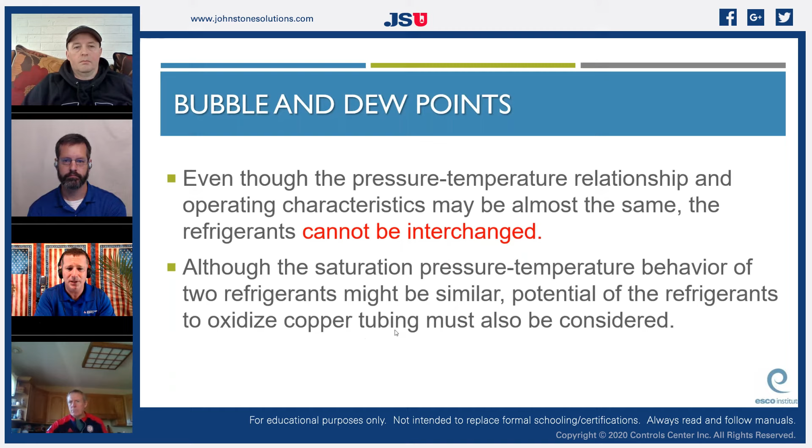So I can't take out an R22 and just slap an R407 in without looking to see that it's operating the same. I can't take a low R22 system and dump 407 on top of it because I'm making a new chemical composition, right? So although the saturation pressure temperatures behave similar, the potential refrigerants can do damage. They can oxidize copper tubing, all sorts of characteristics. Whenever you start blending refrigerants, you become a new chemist, and I don't know that any of us are qualified to know what that chemical is.

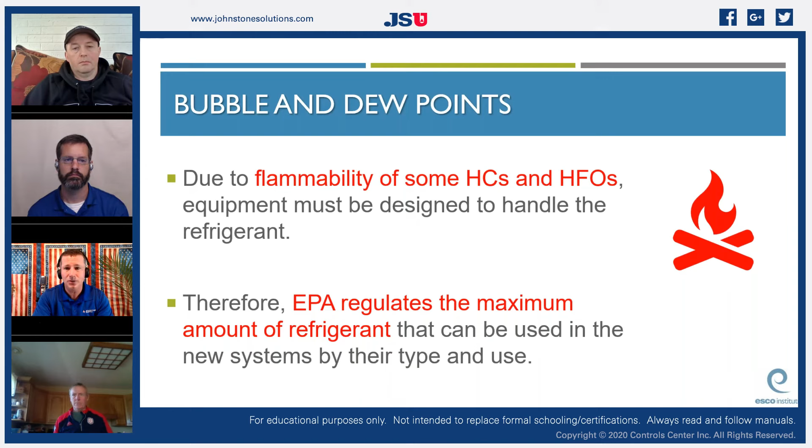So due to the flammability of some hydrocarbons and HFOs, the equipment must be designed to handle the refrigerant. Therefore, EPA regulates the maximum amount of refrigerant that can be used in the new systems by their type and by their use. So that R290 that's being used in those coolers is just a few ounces. It's actually measured in grams. I don't know if we'll get into that. That might be a separate class.

When retrofitting or converting a system to use a different refrigerant, only EPA approved substitute refrigerants can be used. Remember, EPA does not approve any substitute refrigerants as direct drop-in replacements to service an R22 or any other system. So EPA doesn't say that. EPA is just teaching you what proper refrigerant procedures are. A lot of our chemical manufacturers are going to be the ones that dictate what are the best refrigerants.

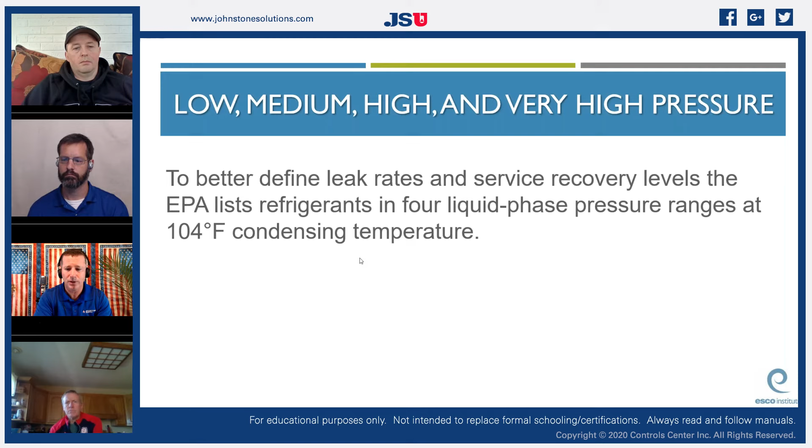So we have low, medium, high, and very high pressure systems. To better define leak rates and service recovery levels, the EPA lists refrigerants in 4 liquid phase pressure ranges at a 104-degree condensing temperature. So if I have 4 operating systems all operating on the same day, and all of those are running about 104-degree condensing temperature, then I'm going to have different characteristics of different refrigerant systems. So let's look at some of those real quick. So there'll be our different classifications.

If we look at low pressure refrigerants, they have a pressure of 30 psi or lower at a liquid phase temperature of 104 degrees. So those are some of our lower pressure stuff like R11, R123, R245, and one of the newer ones, HFO 1233. So HFO 1233 is going to be a low pressure. It's going to do some replacement for some of these commercial chillers and such.

If we look at medium pressure applications, they have a pressure between 30 and 155 at a liquid phase temperature with a 104-degree condenser. So that's going to be like R12, 124, 409, 134A, 600, 1234YF, and that 1234ZE. So they're considered medium pressure systems.

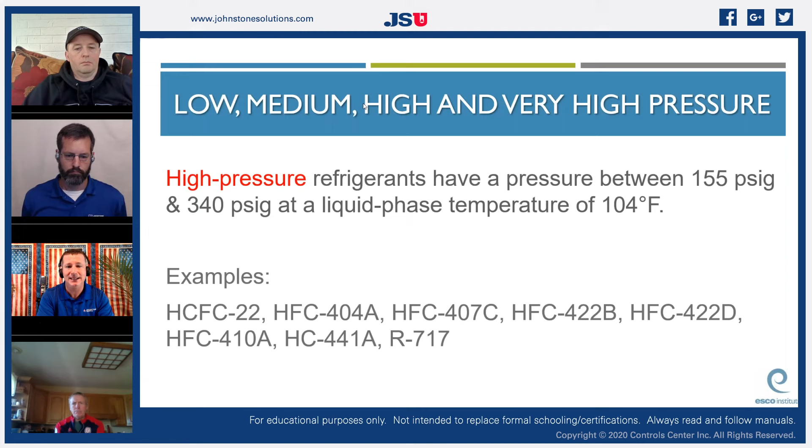If we look at high pressure systems, a lot of us are going to be familiar with this. Those are systems that have a pressure between 155 and 340. So their head pressure is going to be between 155 and 340 when it has a condenser temperature of 104 degrees. So that's most of the refrigerants we know: R22, R404, 407, 422B, 422D, R410A, 441, and 717. So what we work on in residential HVAC is considered a high pressure application.

We do have now a very high pressure class of refrigerants. They have high side pressures over 340 when I have a condenser that's at 104 degrees. The main one, and we'll talk about it some more, is CO2. CO2 is classified as R744.

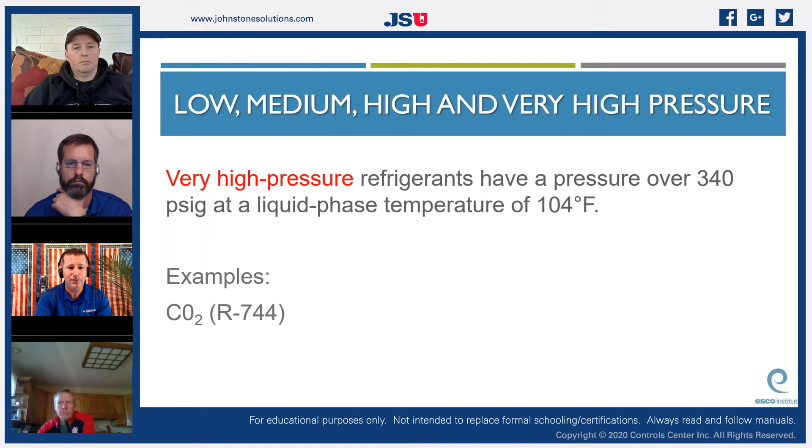We have different oils in our systems. Most CFC or HCFC refrigerants and ternary blends use synthetic alkyl benzene. We used to use a lot of alkyl benzene oil in our systems, especially with our reciprocating compressors. When retrofitting HCFC refrigerant systems to HFC refrigerants, or when working with newly manufactured systems, synthetic polyester oil is most commonly used. So most of us are familiar with POE, polyester oil.

Ester-based oils cannot mix with any other type of oil. So that's the thing we have to be careful with. Sometimes when we change refrigerants, we actually have to change oil as well, depending on what our operating system is.

So when we talk about retrofitting systems, before retrofitting an HCFC system to an HFC refrigerant, the other types of oils must be removed from the system before adding the ester base. And I did that a lot in my commercial industrial rack systems.

So say I had a commercial medium temp system that was operating on R22. When I took that R22 out, it probably had an alkyl benzene style oil. We had to actually drain all the oil out of that entire system, go through and replace all the O-rings, and put new polyester oil in it to be able to go to a new refrigerant. So it can be very time consuming to retrofit a system with a new refrigerant.

Care must be taken when using ester-based oils. They are very hygroscopic and will absorb moisture out of the air and through some containers. So polyester oil, if I take a can of nice clear polyester oil, open up my can, take my safety device off, put it into a container, it looks pretty clear, might have a little tint of yellow to it, and I put it on the table. If I have a fairly humid room and I come back tomorrow, it's actually going to be a higher level inside of that, and it's going to be milky because it has absorbed moisture from the air.

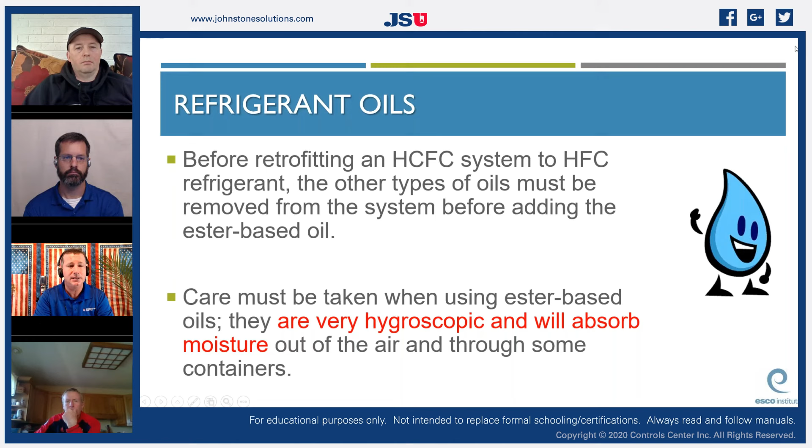So our 410A that we use, it uses POE oil. So we have to be aware that these POE oils are quite hygroscopic. And we actually have manufacturers like Daikin moving into newer style oils, trying to get away from some of that.

A part of doing and understanding refrigerant management is understanding where we came from. A lot of this was brought to us through the Montreal Protocol and the Clean Air Act. There's going to be some questions on this, and they want you to understand the history. So the United States is part of the Montreal Protocol, which is an international treaty that addresses ozone depleting substances. So it's not just the refrigerants that we know, it's a variety of different substances that use manufactured chlorine, right? Because that chlorine is our culprit.

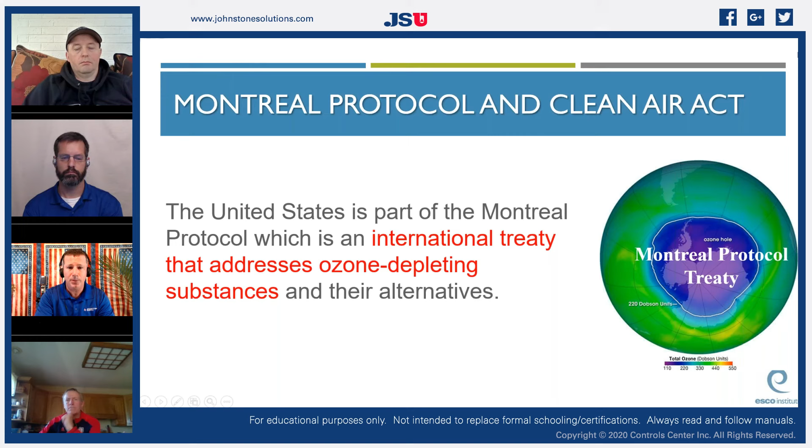So we are a part of the Montreal Protocol, and as part of that, when they met for this, and we'll talk about the date here in a minute, they decided that we had to make a change to our refrigerants because it was scientifically proven that our refrigerants were a major culprit in the change of the world that we live in.

So to stop the damage to the stratospheric ozone layer, the United States is phasing out or has already phased out the use of all chlorofluorocarbons, hydrochlorofluorocarbons, and any other refrigerants that are harmful to the environment. So it's based on the chemical composition. We started with chlorine, but we're now moving into the fluorinated ones.

So if we look at Section 608 of the Clean Air Act, that's the portion of the regulation that governs our license. This is where our license comes from, right here. Section 608 of the Clean Air Act sets forth the rules and regulations for refrigerant handling in the HVACR industry, us. There is a Section 609, and it pertains to automotive.

Paul Grimm, master technician here, has the 609. So he's carrying a 608 and a 609. They're two different certifications, but it's for the same thing. It's for safe refrigerant handling. We are the HVACR industry, and we are governed by Section 608.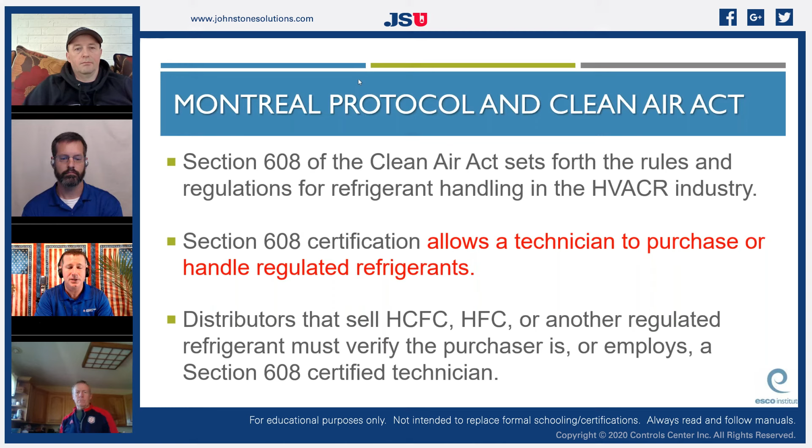So Section 608 certification allows a technician to purchase or handle regulated refrigerants. You cannot come into a Johnstone Supply and buy a jug of refrigerant without a 608 license. Distributors that sell HCFC, HFC, or other regulated refrigerants must verify the purchaser is or employs a Section 608 certified technician. So that is our responsibility. We actually keep your certification number on file at Johnstone's under your name.

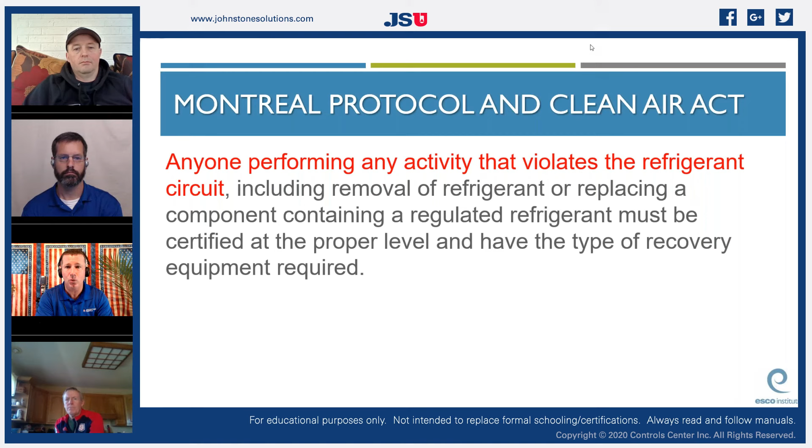So anyone performing an activity that violates the refrigerant circuit, including removal of refrigerant or replacing a component containing a regulated refrigerant, must be certified at the proper level and have the type of recovery equipment that is required for that section. And as we dive into type 1, type 2, and type 3, we'll go over all of those individually.

So it is illegal to knowingly release CFC refrigerants, HCFC refrigerants, or HFC refrigerants during the service, maintenance, repair, or disposal of appliances. A technician must have their Section 608 certification card in their possession when performing an activity regulated by Section 608.

If your 608 certification card is lost, request a replacement from your certifying organization, not the EPA. The EPA governs it, they don't issue it. That's where companies like ESCO, who provides this fantastic presentation, come into play. They are the educational body and the certifying body of the license. The EPA just sets the requirements.

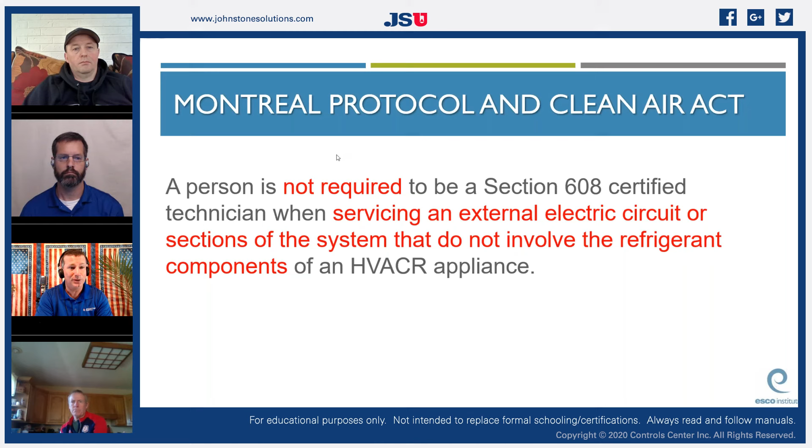A person is not required to be a Section 608 certified technician when servicing an external electric circuit or sections of the system that do not involve the refrigerant components. So you can be an apprentice and you can help service that AC unit. You can do electrical diagnosis, but if you put those gauges on that thing, you better be certified. Because if an EPA inspector comes by and asks for your card and you don't have it, somebody's getting a nasty fine.

The Clean Air Act, so that is part of the EPA regulation, allows for releasing an exempt refrigerant like ammonia or CO2, or a small amount of refrigerant mixed with nitrogen, like when we test charge systems for leak detection. Otherwise, they don't allow it.

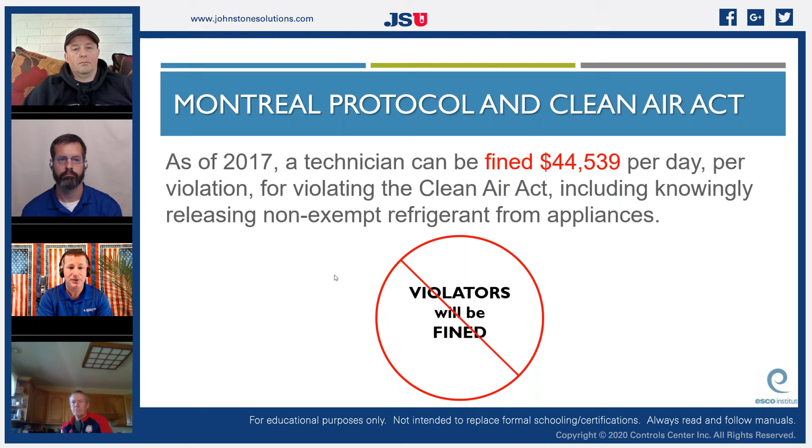As of 2017, look at this. As of 2017, a technician, not the company, the technician can be fined $44,539 per day per violation for violating the Clean Air Act, including knowingly releasing non-exempt refrigerants from appliances. So pretty significant fines available. So these are the regulations that support the necessity for a 608 license.

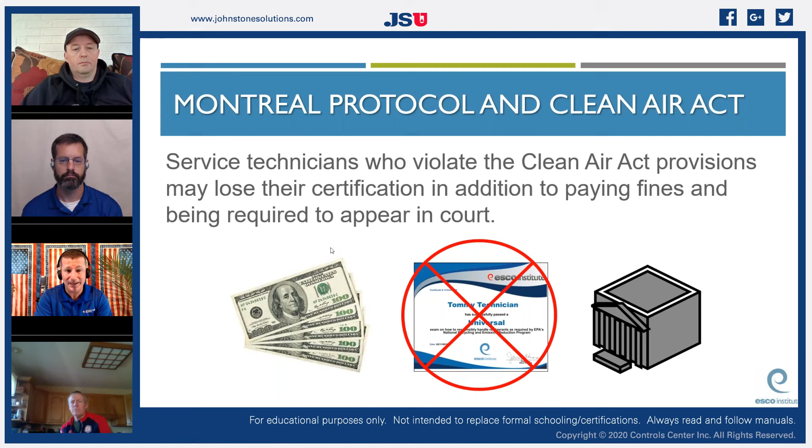Service technicians who violate the Clean Air Act provisions may lose their certification in addition to paying fines and be required to appear in court. It's taking this stuff very seriously. It's the technician's responsibility to comply with any future changes in the law or EPA regulations after a technician becomes certified. That's why I've been encouraging everyone to join this program, even if you're already certified, because there are a lot of changes that are happening in our regulations, and it is the technician's responsibility to stay up to date.

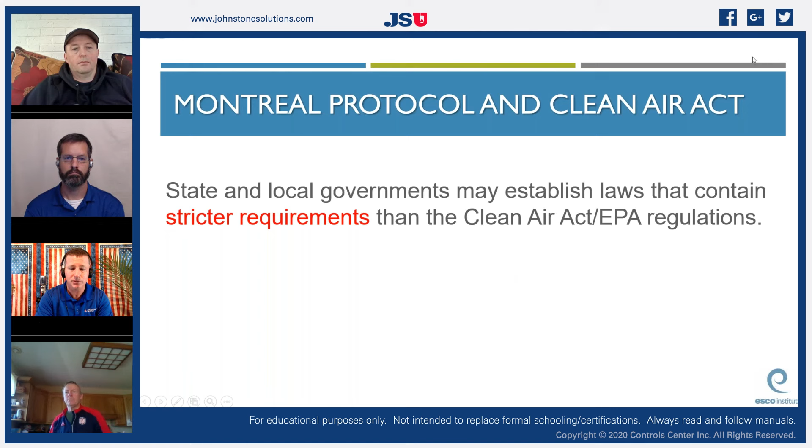It's not like a lot of state licenses that require continuing education hours. Your EPA, it's a voluntary education process. And so we highly encourage you to stay educated with new rules and regulations. State and local governments may establish laws that contain stricter requirements than the Clean Air Act. So, local municipalities can enact more stringent regulations if they want to. What this is just saying is this is the minimum expectations.

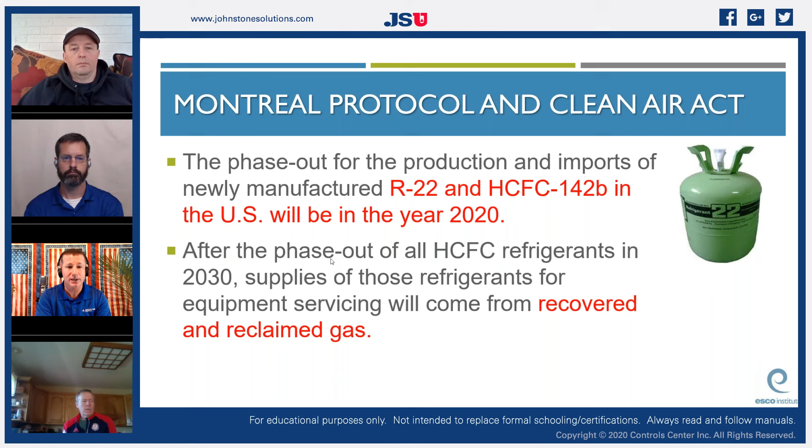So the phase out for the production and import of newly manufactured R22 and HCFC 142B will be in year 2020. We all know that. R22 is out the door. After the phase out of HCFC refrigerants in 2030, look at that, all HCFC refrigerants in 2030, supply of those refrigerants for equipment servicing will come from recovered and reclaimed gases only. It's all HCFCs. It is not a violation of the refrigerant management regulations under the Clean Air Act to service a system that uses CFCs or HCFCs after the phase out of those.

Right, reclaimed refrigerant must meet AHRI standards. Remember, we get into AHRI, we're talking about health and safety, before it can be resold under EPA's regulations. Very strict requirements. We'll talk about that in a minute too.

Technicians can only use CFC, HCFC, or HFC refrigerants back into the same appliance or into another appliance owned by the same owner. So if you have an apartment complex that owns a whole bunch of R22 systems and you have clean R22 coming out of a system because you're just upgrading to an R410A system or whatever, that refrigerant can actually be reused by that same owner. Can't be charged for it, but it can be reused by that same owner. It cannot go anywhere else and be used, but it can be used by that same owner.

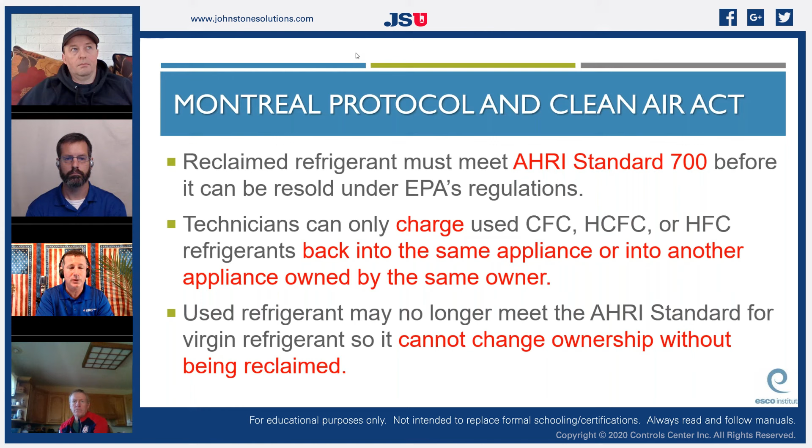Used refrigerant may no longer meet the AHRI standards because it could have water, it could have moisture in it, it could have acid, it could have all kinds of contaminations. So it cannot change ownership without being reclaimed. When we also talk about some of the Clean Air Act stuff, Montreal Protocol, all CFC, HCFC, HFCs, and the HFOs, refrigerant recovery equipment must meet EPA standards. So recovery equipment must be tested according to AHRI standard 740. Good one to know.

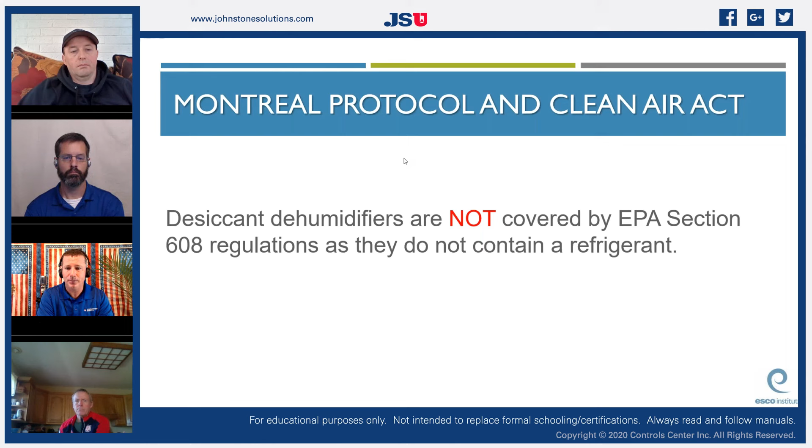Recovery machines may be able to recover one or multiple types of refrigerants, and most of ours are. Now, some of our older recovery units, which we actually talked about in our recovery equipment class, some of our old ones actually used oil for the actual recovery process. And we had to change oil every time that we used those because we had different refrigerants, and some refrigerants didn't like the oils. So we had the potential to contaminate our equipment very easily. Desiccant dehumidifiers are not covered by EPA Section 608, because they do not contain a refrigerant.

Self-contained recovery devices remove refrigerant from an appliance without the assistance of components in the appliance. Now we're going to talk about some oddball stuff here, and it's going to apply primarily to type 1 and type 3, not a lot for type 2, but you still need to be aware of it. We have two different types of recovery systems.

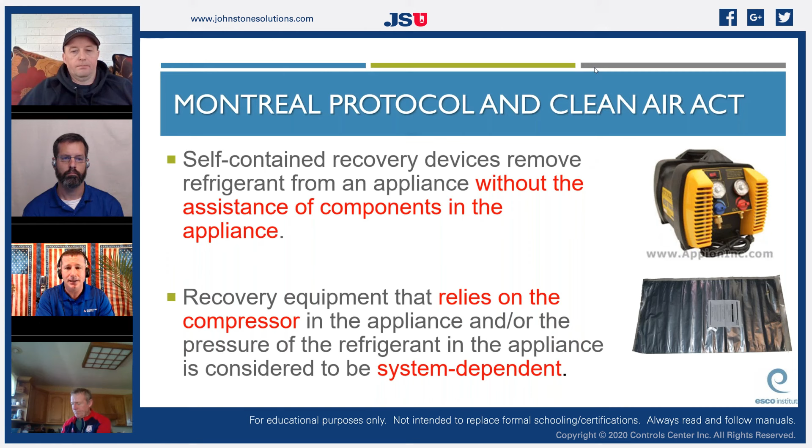So we have the self-contained, and we also have what we work with the most. Recovery equipment that relies on the compressor in the appliance or the pressure of the refrigerant in the appliance is considered to be system dependent. A lot of people don't encounter these, but we need to be aware of what they actually do. And we'll spend a little bit more time on that here in a minute.

So to make it easier to recover refrigerant, EPA regulations require appliances that do not have service valves to have a service aperture or a process stub. You'll find that on packaged window air conditioners, on domestic and fractional refrigeration systems. So that refrigerator in your house does not have service fittings on it. It has a process stub, which is just a piece of copper that's been pinched off and soldered, and that is it. You don't have service ports on that thing whatsoever. And you'll see that quite often in our type 1 equipment under 5 pounds.

When disposing of appliances with 5 to 50 pounds of refrigerant, EPA does not require technicians or the company employing the technician to record the model and serial of the appliance. However, records must be kept that include the type of refrigerant, the quantity recovered from disposed appliances in each calendar month, and quantity of refrigerant by type sent for reclaim or destruction.

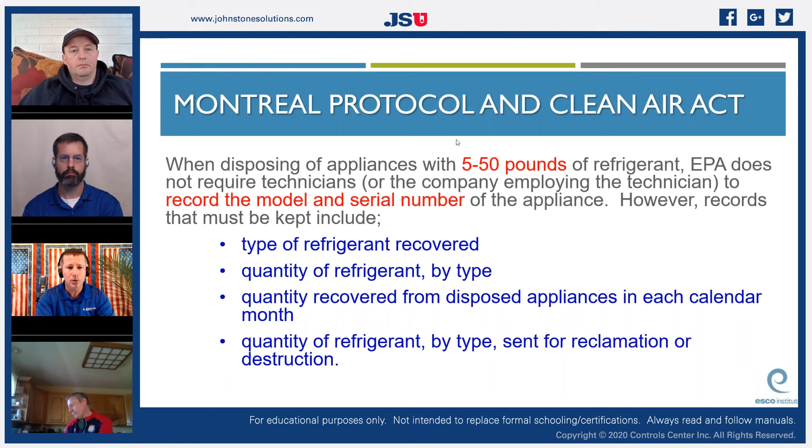So EPA's refrigerant management regulations exempt certain refrigerants from the venting prohibition, right? Because remember, we can't vent a refrigerant except certain ones, and we'll learn about what those certain ones are. This can occur when the EPA determines that a certain refrigerant does not pose a threat to the environment if it is released. So some natural refrigerants, such as CO2, can be purchased by someone who is not Section 608 certified because it is just a natural refrigerant.

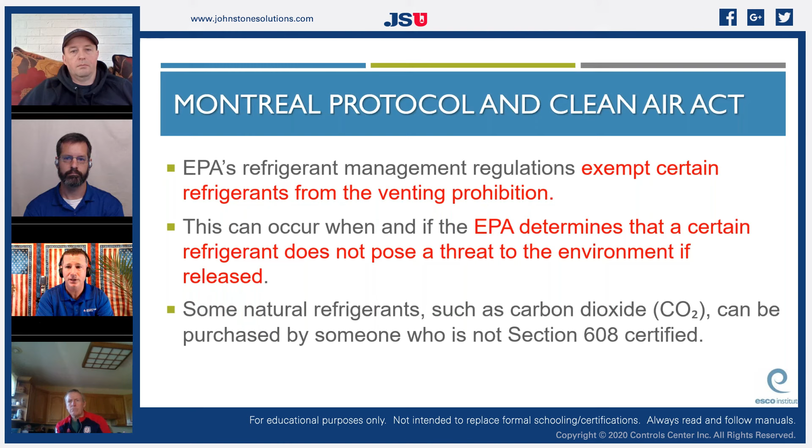One of the things is it's 9 o'clock. All right, thank you. It may go a little bit over. So just hang in tight, everyone, and I'll get through just a little bit more and we'll finish up tomorrow. Actually, yeah, let me get through a couple more slides.

It is lawful to service existing R22 systems and use existing supplies of R22. It is not legal to top off an R22 charge with another refrigerant, such as R410A or any other refrigerant. Topping off of one type of refrigerant with another can void equipment warranty, ruin the refrigerant, damage the equipment, and cause severe personal injury or even death.

So when discarding or disposing cylinders of CFC refrigerants, HCFC refrigerants, HFCs or HFOs, recover all remaining refrigerant, render the cylinders useless, and recycle the metal.

Sounds like a great place to stop, doesn't it? Lots and lots of information on this, and there's so much stuff to cover. That's why even an entire week of doing one to 1.5 hour classes is going to be tough to cover everything. So there is a lot of effort that you can do on your part. You can purchase the study manual. I should have this back up on our channel so you can revisit what we've been discussing today. You've got all of the free practice tests at esco.com, so just do some due diligence for yourself.